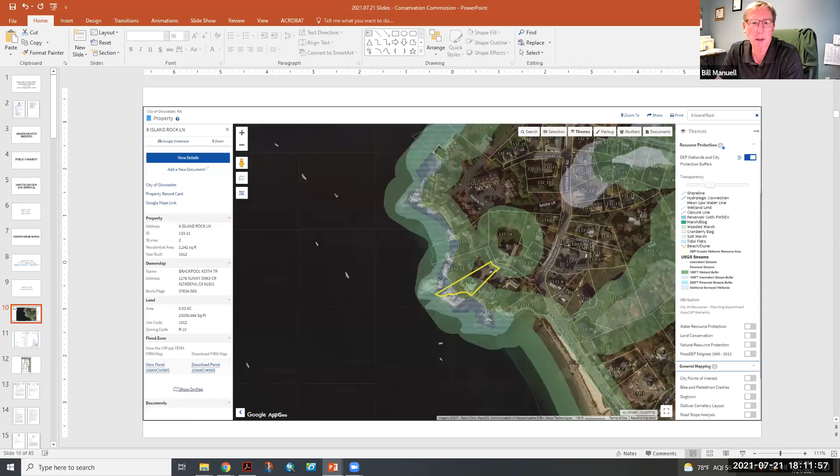Okay, next up, notice of intent 28-2774, 8 Island Rock Lane, Brackpool, Bill Manuel at Wetlands and Land Management representing. Good evening folks, Bill Manuel from Wetlands and Land Management. Speaking about things that just can't seem to get off the agenda, this was one of them, but I'm happy to report that since the last meeting I had a video conference with Kate Frew and Tay Evans at DMF. We worked through some clarifications that they were looking for on the site plan, and those have been provided. DMF has given you a letter dated July 14th stating they have no further resource concerns with the proposed project at this time. So unless the commission has any more questions, I think that was the outstanding issue, and I'd be happy to answer any questions if you have them.

Okay, so first we'll open up the public comment. Hold on a second, let me write something. Okay.

We're going to open up for public comment. Anybody in the public who wishes to speak for or against the project at 8 Island Rock Lane may do so now by hitting the raise your hand button at the bottom of your screen or hitting star 9 on your tablet or handheld device or phone.

I see no members of the public to comment at this time. Hearing none, I'll close the public comment period. Why don't we do roll call comments from the commission?

Sure, commissioner comments. Commissioner Charpentier, no comments. Commissioner Cook, no comments. Commissioner Gradwell, no comment. Commissioner Sargent: I want to thank you for the meaningful revisions you've provided, and I suggest that all material must be non-toxic in a marine environment. That's it.

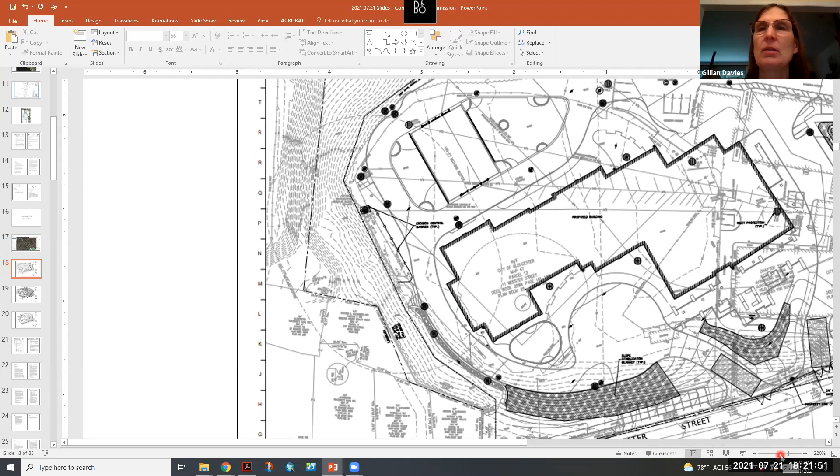There had been a plan to do some seeding and planting, and it was going to be buffer zone planting. So I recommended that be converted to wetland planting instead, and that it could be an opportunity for an educational area — kind of an outdoor science classroom with some signage about wetlands and their significance and the restoration work going on there, and really become a feature, something exciting that results from the project, as well as restoring the wetland.

I made that recommendation regardless of the regulation status, because it seemed like something that people could do voluntarily if they so choose, if it's not a regulatory issue.

I did receive LEC's response to my comments, but just today, and I was already booked for today, so I haven't had a chance to go through them in detail. I'm happy to do that — I will go through them in detail and provide a written response once I have a little more time for that.

Does anybody have any questions? And then Dominic Rinaldi, our engineer, will be able to talk about the stormwater aspects. Commissioners, any questions at this time? I have none. Okay, why don't we move on then?

We can move to who is going to speak. There we go. Hi, you're up.

Good evening, Dominic Rinaldi, senior civil engineer with BSC Group. Thank you for bringing up the letter. So we issued a letter — we went through the plans and stormwater report to review the stormwater management design. I'll go through that.

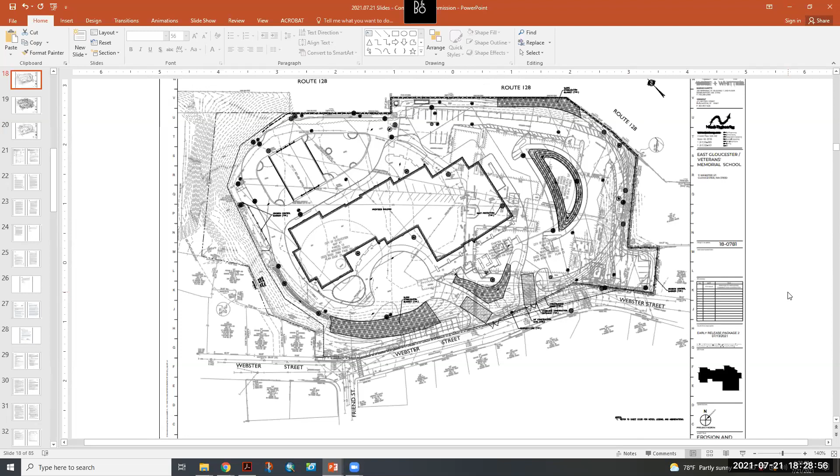That, and I still have concerns about what they consider their retention ponds, because I was told by someone in a retention pond company that you really shouldn't have retention ponds on school properties. We already have one in West Gloucester, and the cover's been off at one time. So there's the 2 big issues that I have.

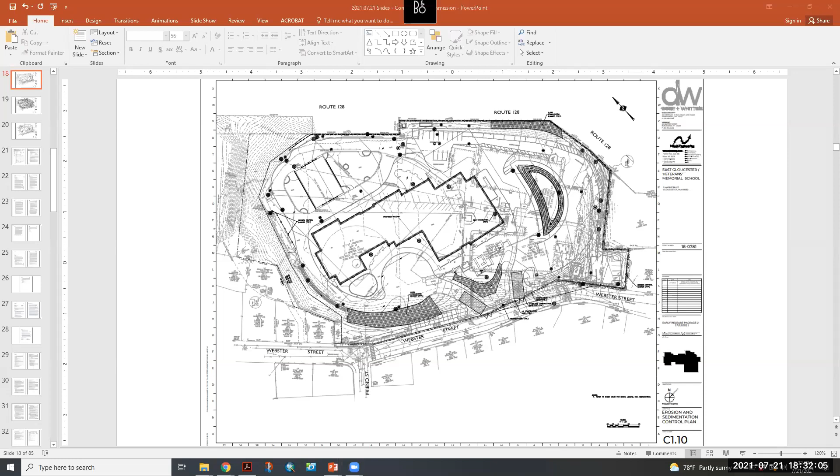Anyone else, Adrian? I see no other hands at this time. All righty then, so I guess if there's no one else.

Seeing none, hearing none, to close the public comment period, what I would do next is probably cycle back to one of the consultants, if anyone wants to answer the questions about the pipes being under the building, or the fill on the edge of the road and some of that, and Ms. Davies' report, or the information she has yet to attain.

I'd be happy to go through some of the wetland concerns and buffer zone related concerns that Gillian had brought up, and that Ms. Armel brought up. Adrian, if you wouldn't mind putting up our response to comments, that would be helpful—and specifically scrolling down to Appendix D.

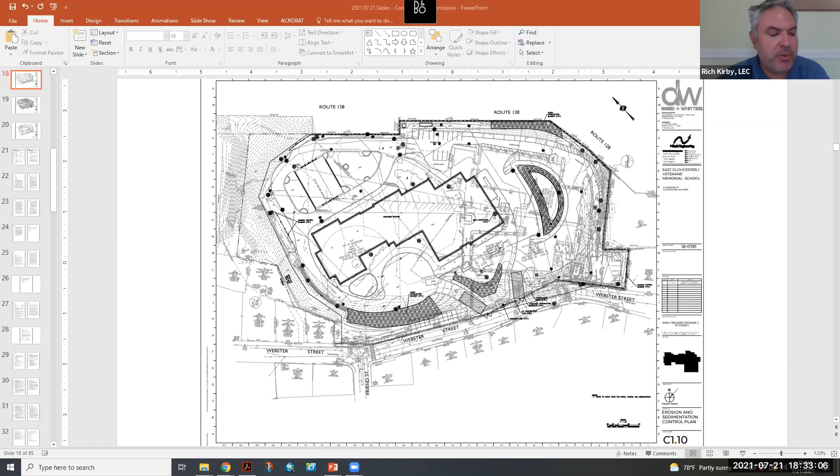While Adrian's pulling that up, one of Gillian's comments was the observation of some wetland plants and wetland soils within the athletic field, the ball field adjacent to the wetland. Of course, as the commission must be aware by now, the wetland is a long linear wetland along the edge of the field behind the tall chain link fence, and measures about 600 square feet. It's not very big, and basically it takes surface runoff and groundwater seepage that comes off the hillside from the west, and directs it northerly toward an existing concrete catch basin. We're going to be replacing that catch basin as part of our project, but we're going to keep the elevation the same so that the hydrology of that wetland remains unchanged.

It's also worth noting that at least when we did our original evaluation, it seems the groundskeepers were maintaining the vegetation within the wetland behind the chain link fence, I think to try and keep the vines and overgrowth off of it. That's what it looked like when we did our original site evaluation last year. Now, however, it appears they've ceased maintaining that vegetation, and it's come back rather nicely with some jewelweed and other wetland plants.

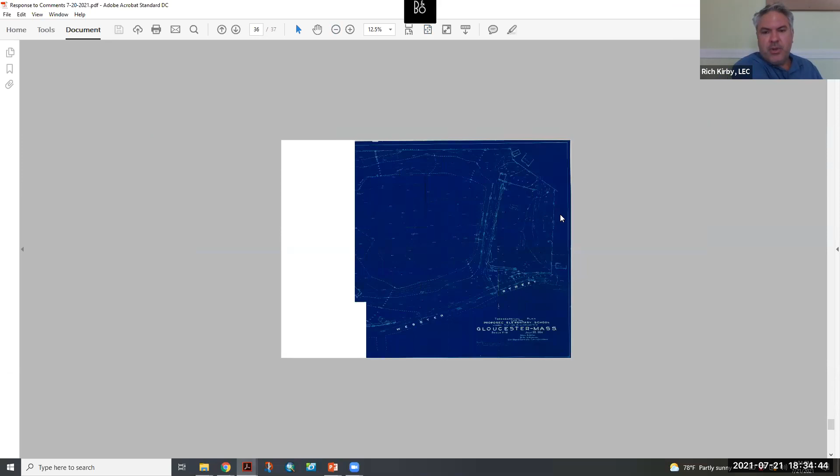So, getting back to the status of the field and whether or not that's jurisdictional—this is a 1954 plan that shows development of the site, and it's really hard to see at that scale, but basically the ball field is to the left, and the backstop is just to the northeast of the bleachers. You can see the chain link fence backstop, so home plate was right to the north, there are the bleachers, and just to the north of that, the chain link fence that looks like a trapezoid—to the right, there, right there. So home plate was right in front of there. And you can see behind home plate some natural sloping that probably was the initial effort at developing this site.

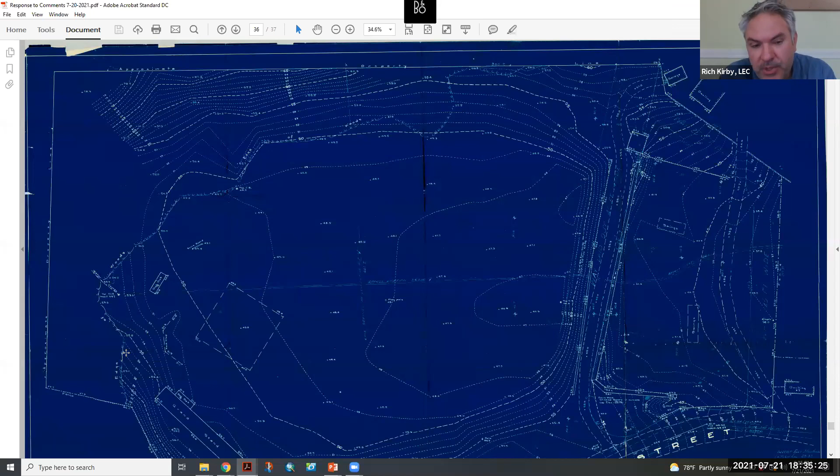If you scroll to the 1957 plan, that's when improvements were made, or certainly proposed. The backstop was moved to its current location, the bleachers are shown there, and you can see the relatively steep slope that parallels the third baseline. That represents more or less the conditions today. So we believe that the field as it occurs now is basically how it occurred circa 1957.

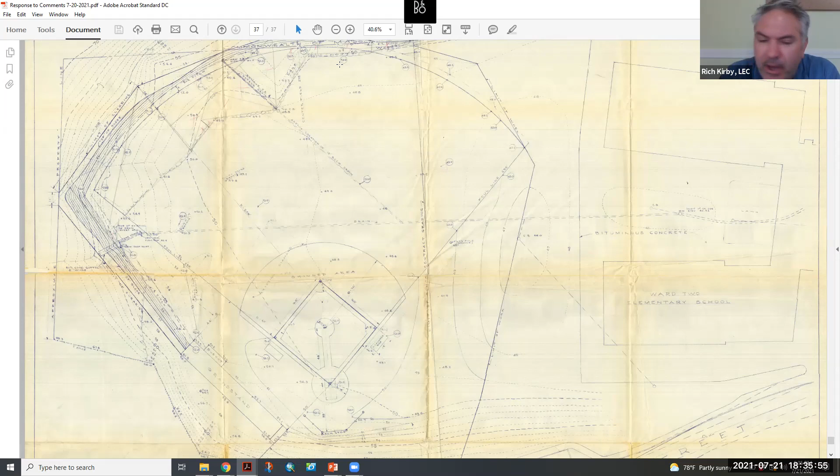Adrian, if you could go to attachment C that shows the revised landscape plan.

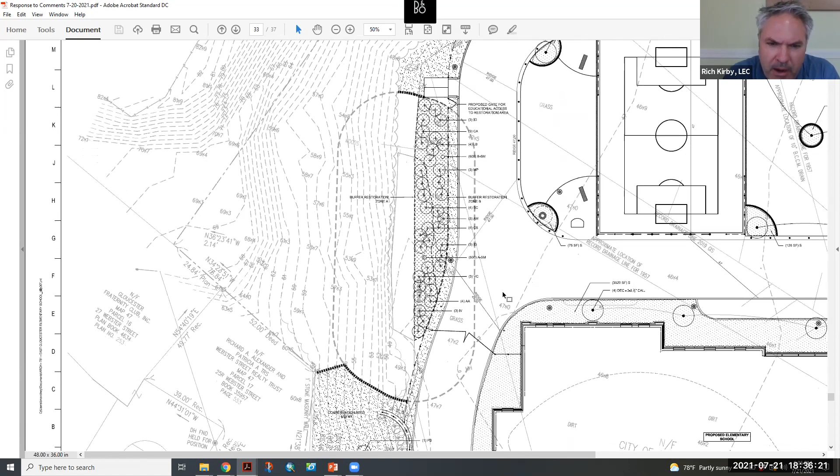I don't think it changes the wetland delineation based on these old plans, but we are proposing buffer zone restoration, and we've fine-tuned that restoration to better represent the hydrology and conditions in the field today. To the right of the wetlands there's a zone of planting, that shaded area. Within that zone there's a line running north and south that cuts it in half. The section immediately adjacent to the chain link fence is the wetter portion of the buffer zone restoration, and we've tailored the planting plan and seed mix to propose shrubs and seeds suited to wetter conditions.

I went out there this past Sunday to take measurements to determine the extent of that wetter portion of the buffer zone restoration. The wetter portion measures 500 square feet, and the balance is another 600 square feet, giving us a total of 1,100 square feet of buffer zone restoration. The balance has more facultative plants that grow in both wetlands and uplands.

This area has a fence along the right side, a 4-foot high fence that parallels most of the paved access road. There'll be a gate in that fence, right near the cursor, to allow students access to enter the restoration area.

We've chosen plants that are interesting to look at, with interesting smells and flowers, and some seed mixtures with a variety of wildflowers and perennials, to really provide an educational focal point for students to learn about wetlands and the restoration effort we've proposed. We may propose some signage along the gates, that's yet to be determined, but this restoration improves the function and value of that buffer zone to protect the adjacent wetland.

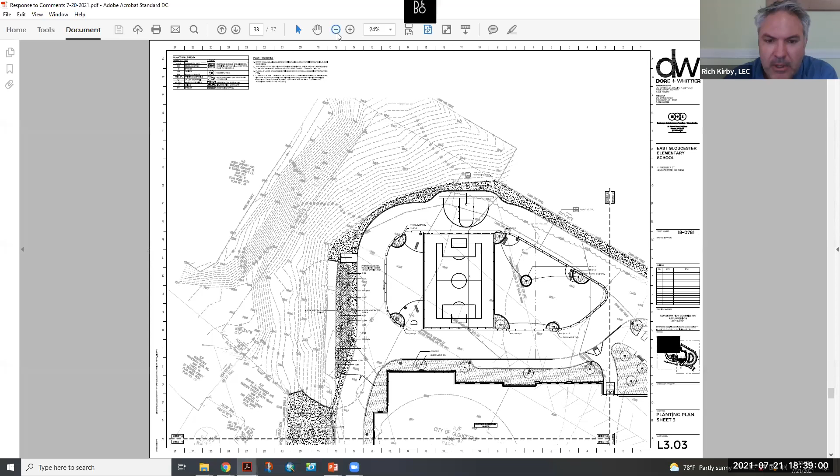We also provided responses regarding the existing chain link fence I mentioned, which will be removed by hand and disposed of appropriately, and replaced by the fence that parallels the access road. That'll all be within the buffer zone.

Sorry, there we go. I have a couple of screens up here.

To get back to public comment concerns - what about the pipe under the building, and the comment about retention or detention ponds not being, or should not be, utilized on school property? Have you ever heard of these issues? That's more of an engineering comment, and I would turn that over to Paige from Nitsch, who can answer those questions.

I don't know if you want to transition over. If you're complete - I think you covered everything, but if you feel you need to. Yes, I covered Jillian's comment that she just made, and the abutters' comment. So I'm happy to shift gears over to Nitsch if it pleases the commission. Yes, please. Hi everyone, I'm Paige Simmons.

I'm with Nitsch Engineering. Can everyone hear me? So to address the comment about the pipes under the building - those pipes are in the existing condition, and they're being removed in the proposed condition and rerouted to address the drainage needs of the proposed site. So there will be no pipes under the building in the final proposed condition.

As for the infiltration basin, it's only designed to fill up approximately 6 inches in smaller storms, and the basin will drain within 52 hours. It's required to drain within 72 hours per the Mass DEP requirements.

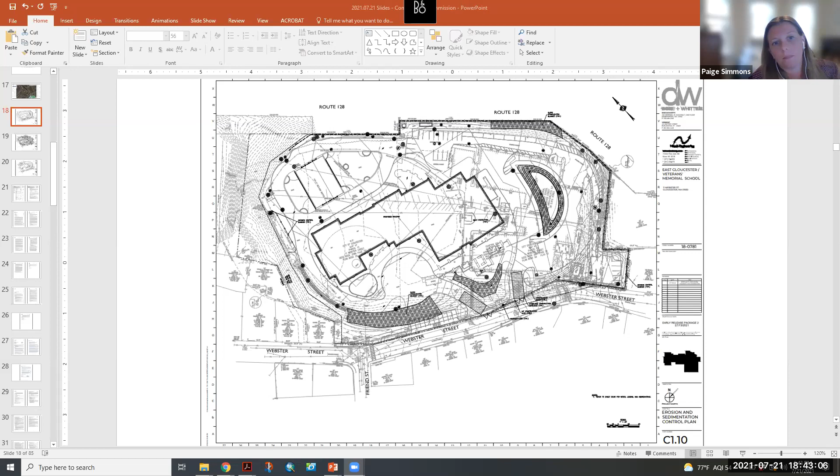Commissioner comments, Commissioner Charpentier. Could you point out where these infiltration basins are? The detention, it's hard to read on this map, or my eyes are getting old. It's actually not on this specific plan. Do you have the utility plan? Maybe one more. Yep, this one here.

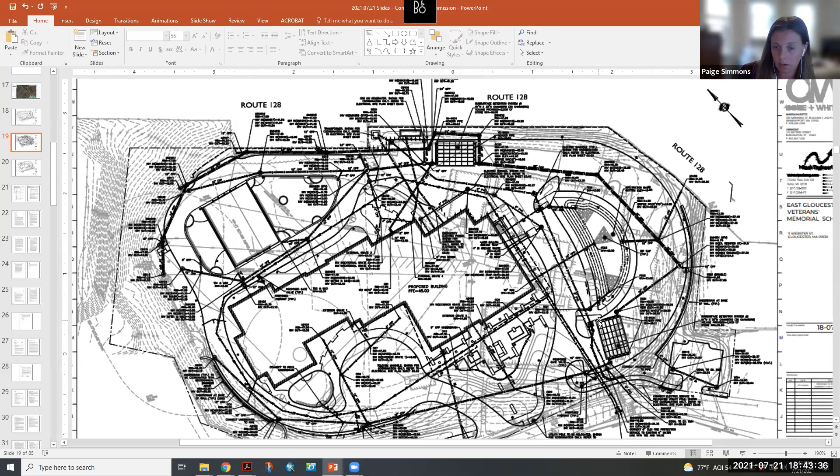So the two that have the boxes are the subsurface chamber systems, one at the top of the site and one at the bottom right side of the site. Those are both subsurface systems that are lined and will not be infiltrating, but will slow down stormwater runoff. Then in the center of the site, in the parking lot, there is the surface infiltration basin that will collect water and then infiltrate it into the ground. The crescent shaped one. Yes, correct.

And you said there's not going to be any standing water there, right? Nope, in the 100-year storm it draws down within 52 hours. Okay.

Are you good? Yeah, the other question I had is, one of the folks who talked earlier talked about the incredible amount of paving that was going to go on. What is the change in the impervious relative to what's there now? I'm sure it's pretty large.

I believe it's 1.9 acres. And the versus the current is what? 1.9 acres, current impervious is 1.9 and the proposed is? That's the increase, the net increase is 1.9 acres. The change. Okay, from what though? I'll have to find that specific number.

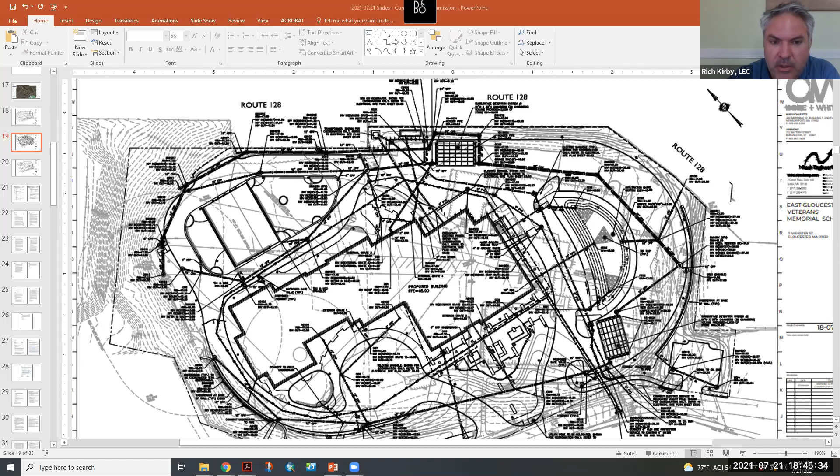To add a little color to Paige's comment while she's looking up the existing versus proposed numbers: the work that's in the buffer zone is focused within the existing previously developed portions. We have a pretty good large section of wooded buffer zone to the west of the wetland and to the north that will remain untouched. So the work we're proposing is largely within the previously developed portions of the buffer zone. I do have some of those numbers to provide a bit of context.

A portion of the proposed structure, the roof area, measures roughly 4,565 square feet, so about 12% of the buffer zone. We have about 22.5% of the buffer zone, 8,062 square feet, that'll be pavement associated with the roadway. And the playground represents roughly 4,390 square feet of the buffer zone, but of course that will be a permeable rubber surface.

So just to give a little bit of a sense of what will occur within the buffer zone. I think it's also important to note that in a project like this, any school project, you're trying to balance a lot of different pieces.

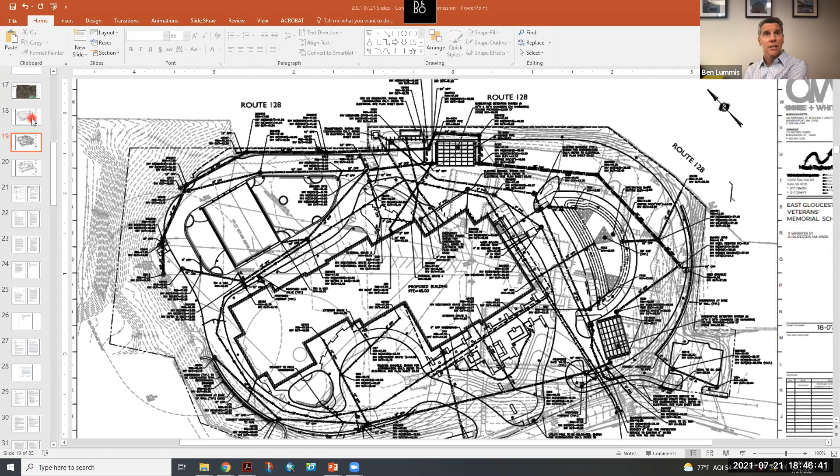Two important pieces to balance here are enough parking for staff and families, and enough circulation to take traffic off of the neighborhood streets during your short times of arrival and dismissal. And then the other important piece is the additional Article 97 land swap, as I think you're all aware, and we are adding green space, open space at the East Gloucester site when the city takes down that school. So there are many pieces to this.

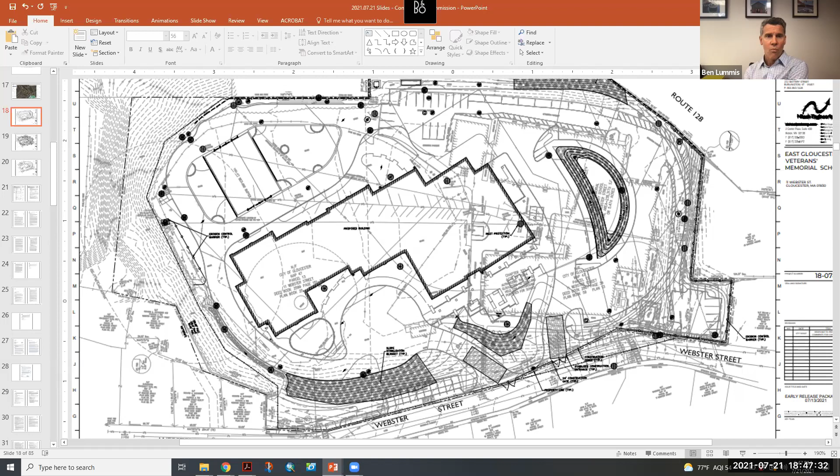I just want to expand on the notion of open space. It's not just this site, but also the current East Gloucester site, which will increase the amount of open space there. I would also add that this project as a whole has a very limited buffer zone that we have jurisdiction over, so we're pretty limited on where we can talk and what we can talk about.

Right. Okay, I have no other questions. Okay, Commissioner Cook.

They're not really questions, I have a couple concerns in reviewing the responses to BSC, which, by the way, really thank you. That summary was very concise, it was easy to read. It looks like they've agreed to pretty much everything.

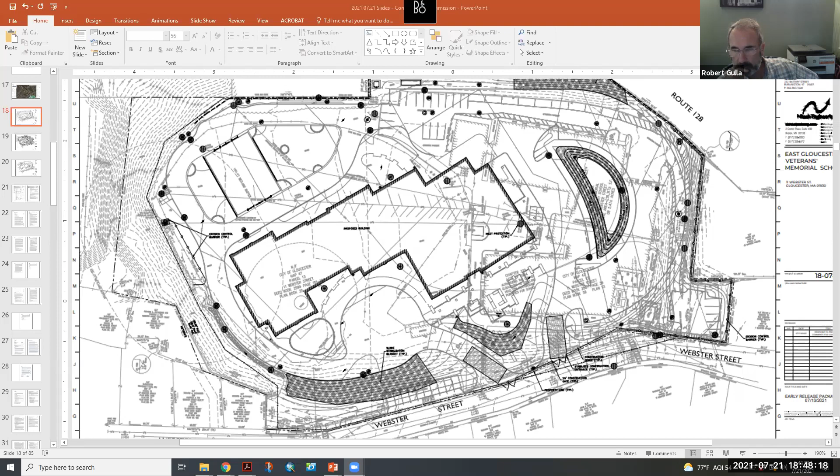There's two notes. One is in item 9, where it talks about after the building is demolished, putting in the test pit. The requirement says that as a condition, the test pit can be provided. There's going to be a lot of work here, so trying to remember everything that we're going to be conditioning could be a little hard. But I wanted to point out that in the response it says the test pit can be added as a condition. I don't know if we can add it more formally into the NOI, all the work steps to show it there rather than it being dependent on us to create it as a condition.

The same thing applies in item 13, with recording the long-term pollution prevention. I'd rather have the NOI say that it will be done versus us trying to remember to make it a condition when this is finally settled. But those were the only two things, the only two questions that I had.

All right, who's next? With regard to the long-term pollution prevention plan, I believe Nitsch had submitted that as part of their response to BSC comments this week. So that's been completed and can be included as part of the record. Excellent. That's correct, we did include it.

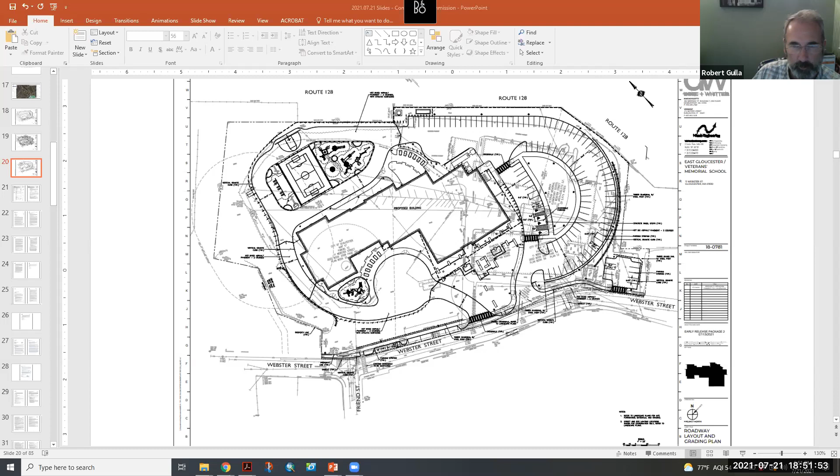So with that, I would assume we're continuing to clean up some loose ends, but in my opinion things look pretty good here at this point. Commissioners had a few comments, the public had a few comments. There's a few gaps, I guess, in getting Ms. Davies to take a look at the documents and review those in a little more detail. So I would assume a continuation to the next meeting is in order, correct?

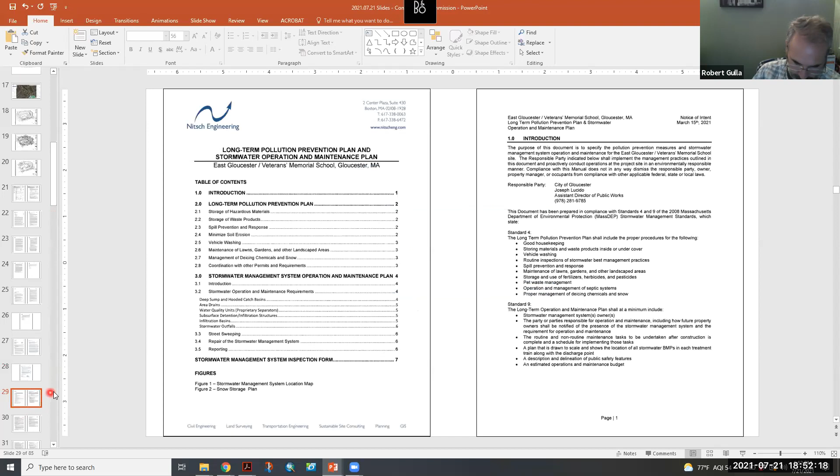Yes, we'd like to continue to the August 4th meeting. Okay, Commissioner Jackson moves to continue 11 Webster Street, NOI 0282776, to the meeting of August 4th. Charpentier seconds. Roll call: Commissioner Charpentier, yes. Commissioner Cook, yes. Commissioner Gradwell, yes. Commissioner Sargent, yes. Co-Chairwoman Jackson, yes. Co-Chairman Gulla, yes. Thank you very much.

Thanks, everybody, we'll see you in a couple weeks. Thank you, folks, really appreciate your effort and work on this. Thank you all for being here tonight.

Okay, next up, no DEP number, 24 Fernwood Lake Ave, Mingzu Yang applicant.

So I did actually track down this applicant. It happens that they were selling the property, which is how they came to need to repair the deck, and have since actually closed. One of the agents in the transaction and I spoke, and they were authorized to make the request to withdraw without prejudice. No work was completed.

Oh, okay. So I guess we move to withdraw, to accept the withdrawal. Just writing things down. Okay, Commissioner Jackson moves to withdraw without prejudice, NOI, no DEP number assigned, for the project at 24 Fernwood Lake Avenue.

Charpentier seconds. Roll call: Commissioner Charpentier, yes. Commissioner Cook, yes. Commissioner Gradwell, yes. Commissioner Sargent, yes. Co-Chairwoman Jackson, yes. And Co-Chairman Gulla, yes. Thank you.

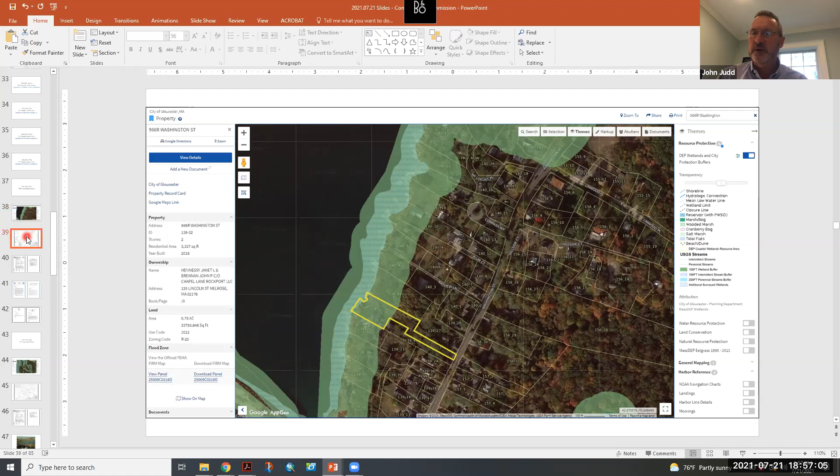Thank you, Mr. Chairman, members of the commission. For the record, John Judd, Gateway Consultants. You may recall we presented this project on June 16th. This is a proposal for a seasonal float and ramp along with a pier that would be situated above the intertidal zone. Thank you, Adrian, for putting up the plan. Also proposed are an addition and a pool that was previously existing on this property, and it was re-permitted to be installed on the last notice of intent when this property was reconstructed about 4 years ago.

That was permitted, so we're back to have these activities proposed. At our meeting on June 16th, there were 4 comments, I think primarily from Mr. Sargent, that I had written down. One of which was the mitigation planting area, which I don't believe you have the latest plan, but it should be in your file. We show mitigation planting along the coastal bank that offsets the 1,000 square foot increase in impervious area proposed within the buffer zone.

Also, the abutter, Mr. Arnold, has submitted an email, which I believe is in the file and should have been circulated to the members. That was dated June 29th, and he states, as an abutter immediately southwest of the property, I have no objection to the pier and seasonal float on the plan created by Gateway Consultants for Tom Grady. So that has been endorsed by the neighbor.

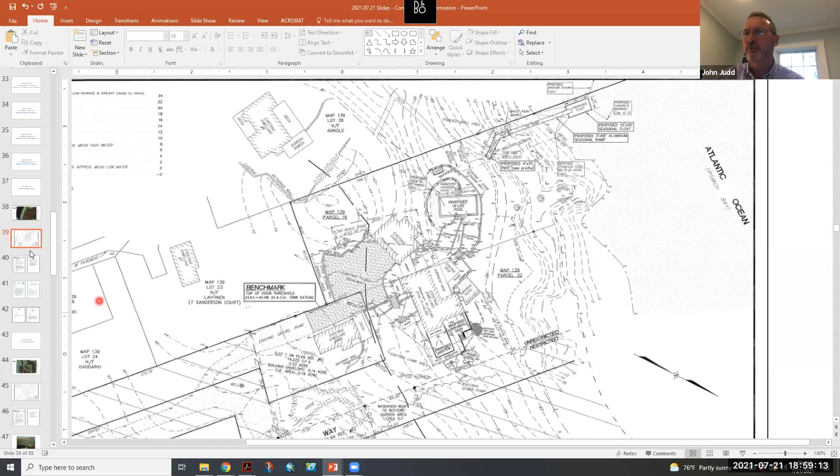Finally, we do have a letter dated the 14th of July from DMF endorsing the project. We did have an eelgrass diver go in to the property, and that was established on the revised plan of June 28th.

So the letter dated July 14th from DMF essentially endorses the project, indicating that there would be no impacts to the eelgrass. So that is a description of where we are, and I think we've addressed all the comments and can answer any questions that you might have.

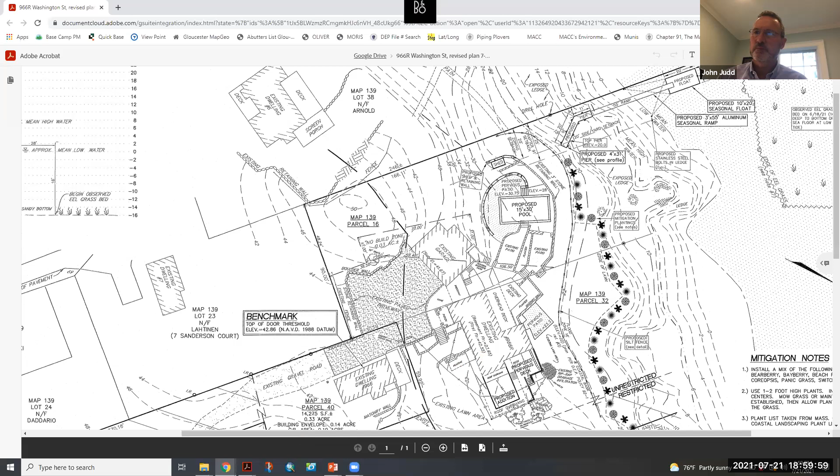Okay, thank you. Next up, we'll do the public comment period. Anyone who wishes to speak for or against the project at 966R may do so now by hitting the raise your hand button at the bottom of your screen or hitting star 9 on your handheld device or phone. No members of the public at this time. Seeing none, hearing none, I'll close the public comment period.

I guess we'll just roll into roll call comments. Sure. Commissioner comments. Commissioner Charpentier, no comments. Commissioner Cook, no comment. Commissioner Gradwell, no comment, everything's fine. Commissioner Sargent, yes, thank you John for the meaningful revisions.

The proposed mitigation for the increased impervious area for the proposed new addition, shed, and retaining wall is roughly 1:1. I'd really like to see a ratio closer to 2:1, as well as monitoring for at least 2 years. And obviously, all material for the ramp of the float must be non-toxic to the marine environment.

Okay. Co-Chairwoman Jackson, no comments. Co-Chairman Gulla, no comments. Okay, thank you. So at this point, what I would probably do, John, are you willing to accept

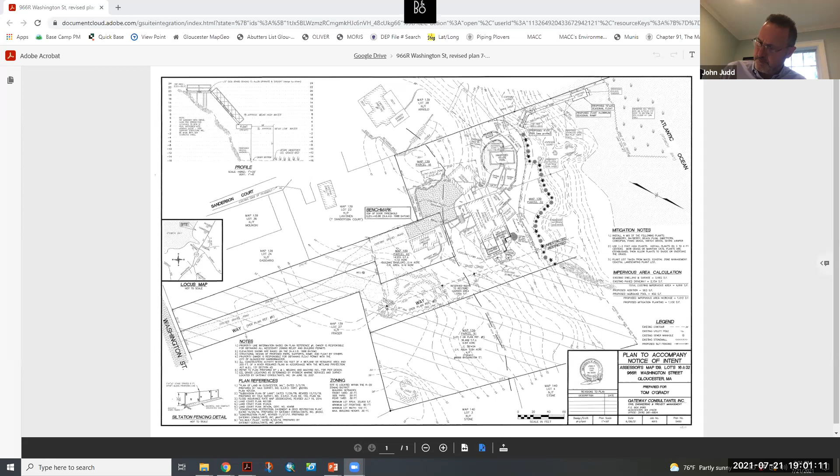the comments by Commissioner Sargent to get it closer to 2:1 and the other couple items he mentioned, to move this forward? No problem. Obviously no issue with the non-toxic materials, that was not intended to be installed anyway. And we can certainly increase the plantings along the coastal bank to meet the 2:1. That shouldn't be a problem on this size property.

Okay, so the final question would be, commissioners, do we want to wait for the planting plan, or are we ready to approve this and move it forward now? It's always a little ticklish. We like to see it before if we can, but I'm open to comments.

I'm good with Adrian looking at it, but we'll see how other commissioners feel. This is Linda, I agree with Ann and Joe. Okay. Barry, any thoughts? No, that's fine by me. She can review it just as well as the 6 of us can. Bill? Nope, no problem with it moving forward. Okay, alright, I guess we move it forward.

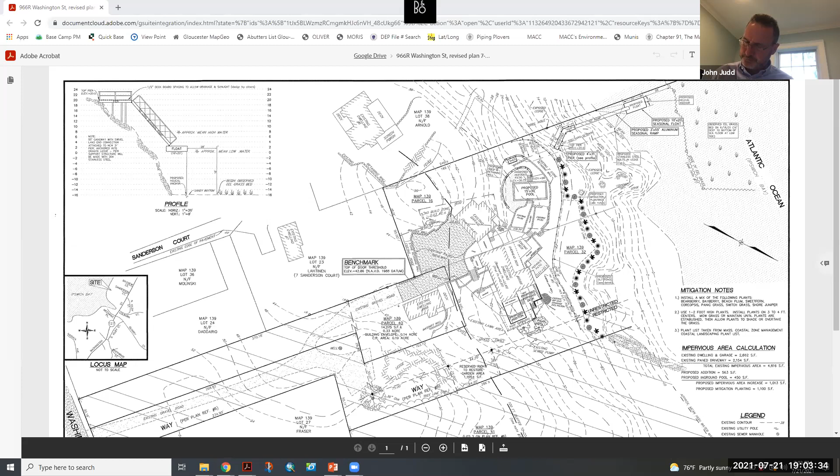Commissioner Jackson moves to approve the project NOI 0282787 at 966R Washington Street with the aforementioned conditions. Charpentier seconds. Roll call: Commissioner Charpentier, yes. Commissioner Cook, yes. Commissioner Gradwell, yes. Commissioner Sargent, yes. Co-Chairwoman Jackson, yes. Co-Chairman Gulla.

Yes, with discussion, do we have all the points that Mr. Sargent mentioned? So it was mortality, it was planting plan up to 2:1, but I thought there were a couple more things in there, Dave. That was just non-toxic to the marine environment. Okay, then yes. Okay, thank you.

Next up, notice of intent 28-2788, 97 Coles Island Road, Barry, John Judd, Gateway Consultants representing. Once again, thank you, John Judd, representing Julia Barry and Chris Crotty for this proposal for the seasonal ramp and pier and float that is their property or properties, several properties out at 97 Coles Island Road.

We did have that meeting on the 16th prior to Adrian going on vacation, and we really hope to get a site visit with the commissioners out there. And I know we tried to tag it on with the Atlantic Street or sidewalk, and it just didn't work out for Julia and Chris. So we were simply asking to maybe schedule a site visit for the board members to go out and take a look at this beautiful property and what they plan on doing out here, and take a look for yourselves to get an idea what the property looks like in the location.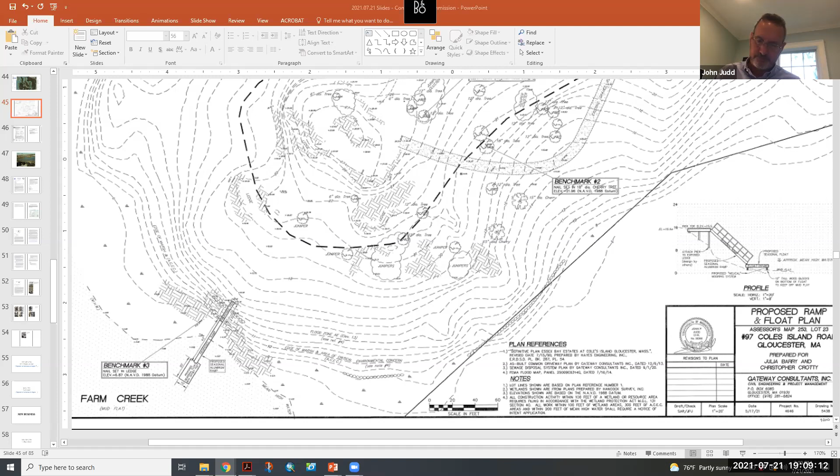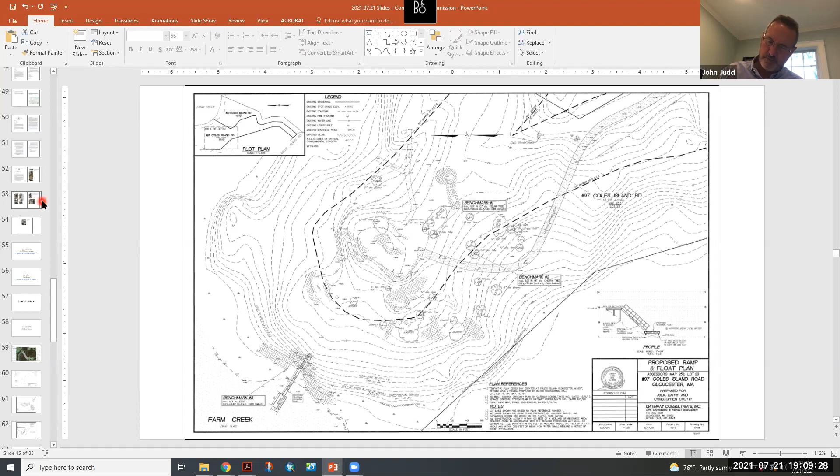We'll move to continue. Commissioner Jackson moves to continue NOI 0282788 at 97 Coles Island Road to the meeting of August 4th. Charpentier seconds. Roll call: Commissioner Charpentier, yes. Commissioner Cook, yes. Commissioner Gradwall, yes. Commissioner Sargent, yes. Co-Chairwoman Jackson, yes. Co-Chairman Gola, yes. Thank you.

Next up is RDA 1703 Salt Island LLC, Martignetti applicant. I believe the applicant requested a continuation to what date? Chairman Gola, you skipped Essex Ave. I skipped who? Essex Ave. Oh, I'm sorry.

Let's back that up. Next up is notice of intent 28-2786, 65 to 73 Essex Avenue, 65 to 73 Essex Avenue LLC, Megan Kearns of Epsilon Associates representing, and they request to continue to August 4th.

Okay, so Commissioner Jackson moves to continue NOI 0282786, 65 to 73 Essex Avenue, to the meeting of August 4th. Charpentier seconds. Roll call: Commissioner Charpentier, yes. Commissioner Cook, yes. Commissioner Gradwall, yes. Commissioner Sargent, yes. Co-Chairwoman Jackson, yes. Co-Chairman Gola, yes. Thank you.

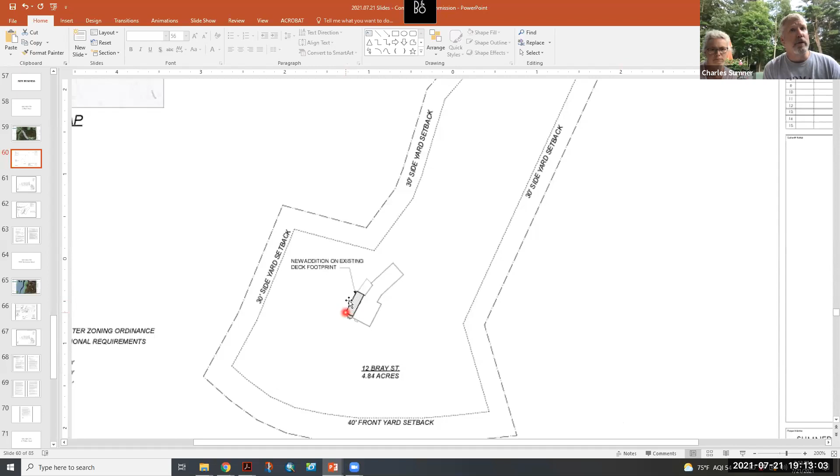We are proposing a small addition off the back of our home at 12 Bray Street, which would fall pretty much upon an existing deck that I actually removed back in late May, before I realized we were in the buffer zone. It's a small shed style addition, about 34 feet long by 12 feet out, with a knee-high foundation running off the back of the house, on the existing porch that's been removed. I think you all have pictures of that.

We are also proposing to include some rain barrels to capture rain off the roof that will be added, as well as some plantings: inkberry, American holly, high bush blueberry, and sweet viburnum. We also have existing plantings off the back already, some rosa rugosa, lilac, and holly.

This is a new process to us, so we're looking for guidance and making sure we're following proper procedures here, and we'd like to get started. We had originally planned to get started back in late spring, but that got pushed off a bit with this process. Well, it's a good start, you're doing well, so good for you.

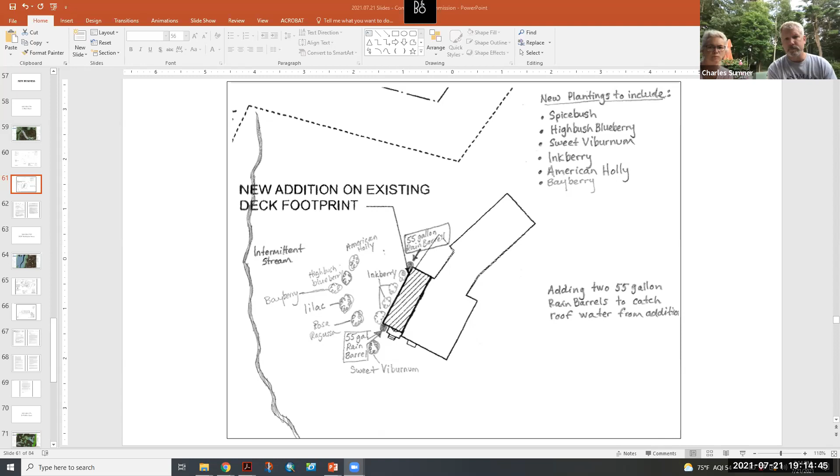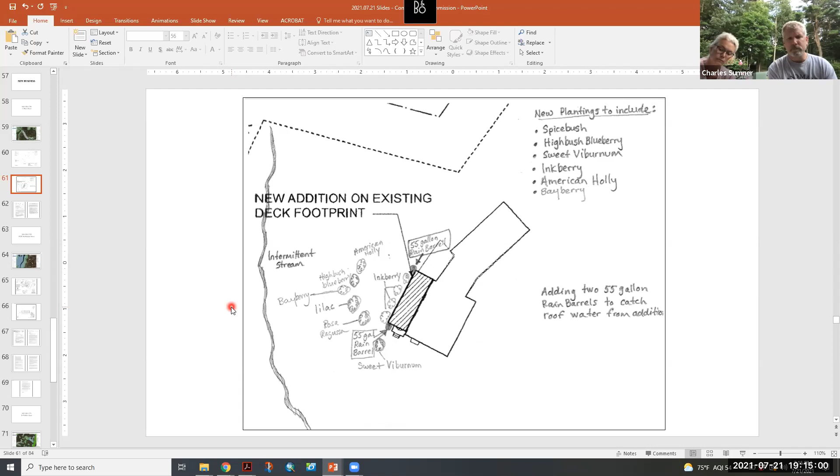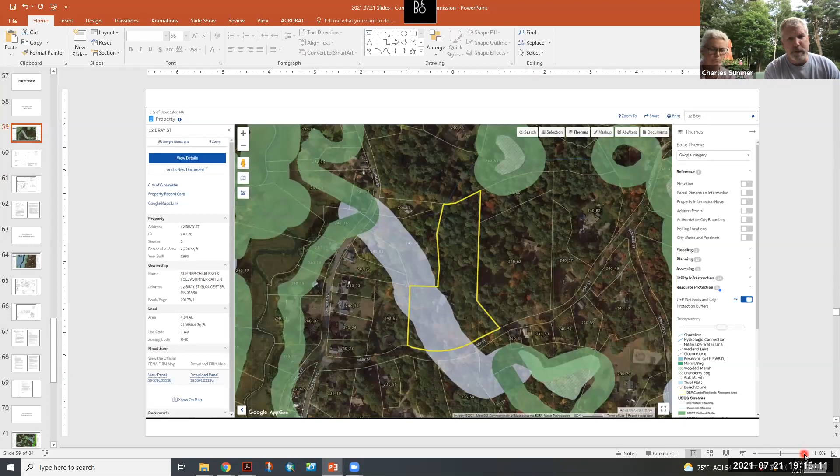The only thing I didn't see here, and we'll do roll call comments, was just the distance from the resource. Could you give me an idea of how far you're from that intermittent stream? Yeah, this year has been a little different with all the rain, but usually that intermittent stream dries up by June, but we're about 100 feet from that stream. Okay, I'm just curious, okay, that's good.

So if you want to go into roll call comments. Sure, commissioner comments. Commissioner Charpentier, no comments. Commissioner Cook, just a question - I didn't see the pictures, but the old deck was just an open deck, no roof, correct, and the new deck is going to be covered? It'll be an addition to the home, so it'll give us some space inside for a dining area and a living area, so it will be a 4-season addition, no plumbing of any kind.

It will have to add some heating into that, obviously, but it's basically encapsulating and closing in what was once an existing pressure-treated deck. Yeah, what we're getting at is whenever you're adding more impervious surface, you're impinging on nature's ability to filter and allow water to move through, so usually we require a certain amount of mitigation to offset what you've done here. You've provided a planting plan, and it's up to the commission to determine whether that plan is enough to offset it, but we'll go through that a bit.

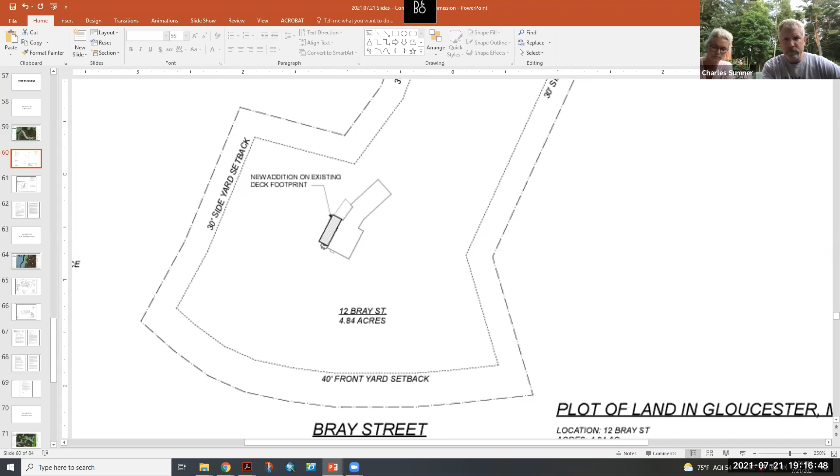Okay, that was Commissioner Cook, I believe. Now Commissioner Gradwall, no comment. And I'm sure that if they have to add a few more plants, they'd be happy to do that so that they could proceed.

Okay, Commissioner Sargent. Yeah, I'd also like to know how much impervious surface they're adding and how much area of mitigation they're planting, and I'd like a 2-year mortality on that. I also noticed that they were very smart and opted to choose mitigation plantings that are deer resistant. Yeah, you've learned that lesson.

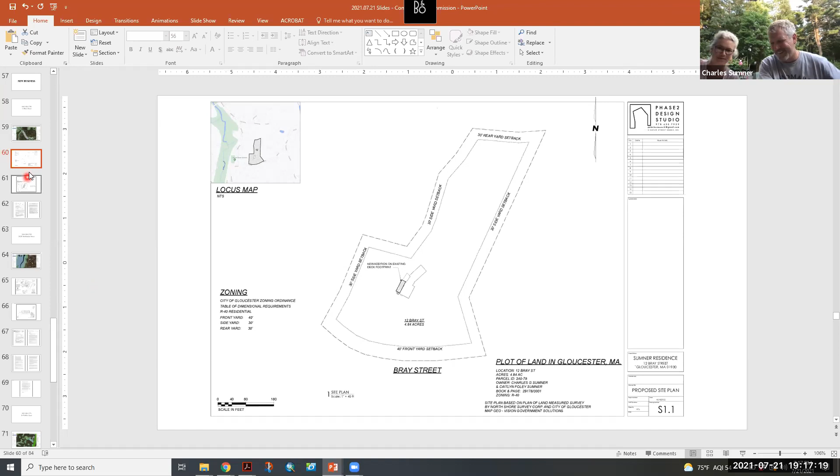Well, I don't know if I can speak to those numbers, maybe I can get some guidance from Agent Lennon on that, but we're happy to provide whatever mitigation. In our plan, we've provided for a silt fence before we start and some hay bales to help offset any disturbance of sediment or soils. We don't plan to do a lot of digging - I've spoken to our contractor and the guy who's doing our foundation, and there's not a lot there in terms of digging. There's going to be no basement, it'll be a knee-high foundation, but it is a 36-foot long by 12-foot foundation.

Okay, so that gives you 432 square feet of new impervious surface, so you need 800 square feet of plantings. Okay.

That sounds doable to us. If I could take you around on my computer right now, you'd see that we're... No, we're good, I think this is pretty straightforward. We can keep moving, okay.

So keep going with commissioner comments. Adrian, please. Sure, Chairwoman Jackson? No comments. And Co-Chairman Gullah? I guess we're done.

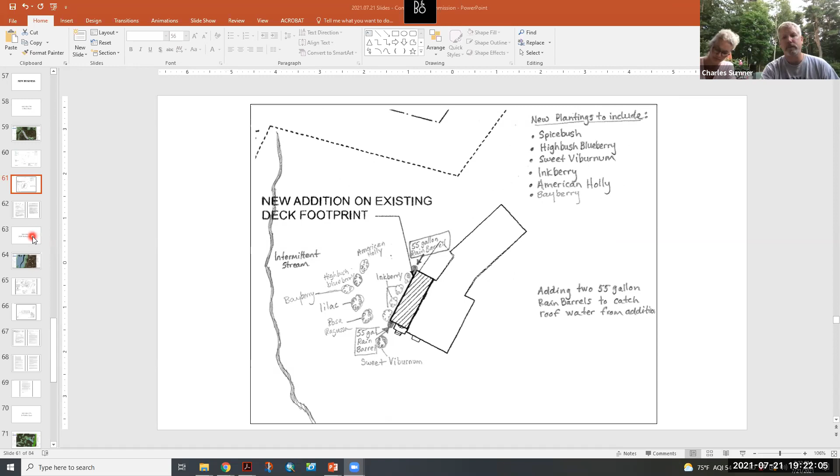Next up, notice of intent 28-2790, 502R Washington Street, Olson, William Manuell of Wetlands and Land Management representing.

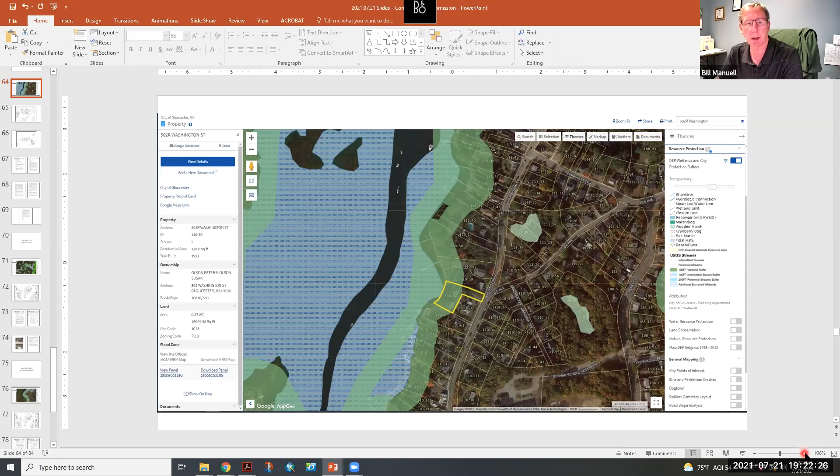Good evening again, Bill Manuell from Wetlands and Land Management. I believe Susan Olson, the owner, is here on the Zoom conference as well. She lives at 502 Rear Washington Street. This is a home that abuts the Mill River.

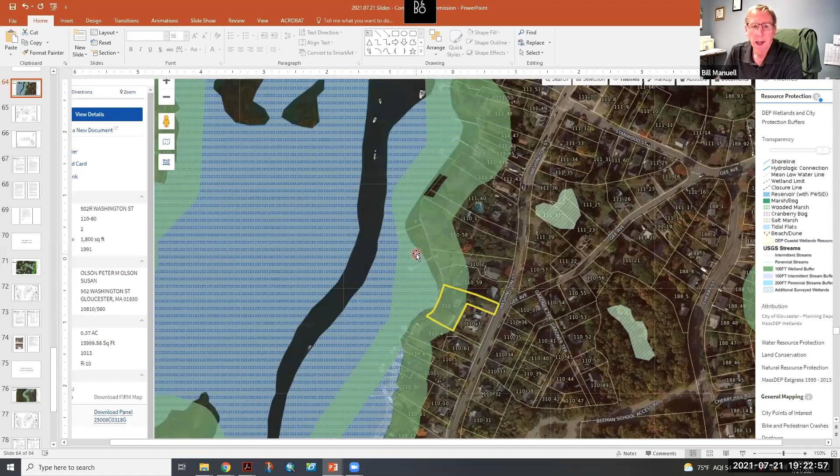You can see it's kind of a pork chop shaped lot, with the arm of the pork chop coming out to Washington Street, just where Gee Avenue intersects Washington Street. The Mill River on that screenshot is to the left of the property. And she has a failing seawall.

A portion of the wall along the river has failed. That's the good portion where Adrian was just highlighting, and where she is now is the failing portion. It is severely eroded — that one bush in the middle of that hatched area, which signifies the area of erosion, is clinging to the bank by a couple of exposed roots.

Susan is obviously very concerned to get some stabilization work done before the next winter storm season. So the area of work — the north would be straight up the page on the top side of the plan. Everything from the northerly property line to the existing shed is in fine shape, and we don't need to touch that at all. The area underneath the shed, where you can see steps down to the water, down to the southerly property line, has been significantly undermined. It appears to have been a stacked boulder wall.

Whereas the northerly side was a masonry wall, it's a mortared granite wall. So there's the difference, and basically the wall is completely failed.

What we'd like to do is repair it by creating a new dry stacked boulder wall. We would backfill behind the wall, install filter fabric, then backfill with double washed crushed stone, encapsulate that with the filter fabric, and that would fill in the area that's been eroded.

I don't think we're disputing the merits of it, but we want to be technically correct about whether or not maybe we should vote on, you know, Adrian, maybe you can chime in here. Should we have voted on it being a riverfront project, already previously developed, or is it small enough where we can just approve or disapprove as is? I think this is redevelopment in the riverfront. Yeah, that's what I figured.

Okay, should we vote on that first? That works. Or we can just consider it redevelopment? Okay, yeah, we can do that after we finish going through comments. Yeah, well, I think I'm the last one and I'm good.

Commissioner Jackson moves to consider the project at 502R Washington Street, NOI 0282790, as a redevelopment project. Charpentier seconds. Roll call: Commissioner Charpentier, yes. Commissioner Cook, yes. Commissioner Gradwell, yes. Commissioner Sargent, yes. Co-Chairwoman Jackson, yes, and Co-Chairman Gullah, yes. Thank you.

Okay, well, I guess we move to close the hearing then? Commissioner Jackson moves to close the public hearing for NOI 0282790 at 502R Washington Street.

Charpentier seconds. Roll call: Commissioner Charpentier, yes. Commissioner Cook, yes. Commissioner Gradwell, yes. Commissioner Sargent, yes. Co-Chairwoman Jackson, yes.

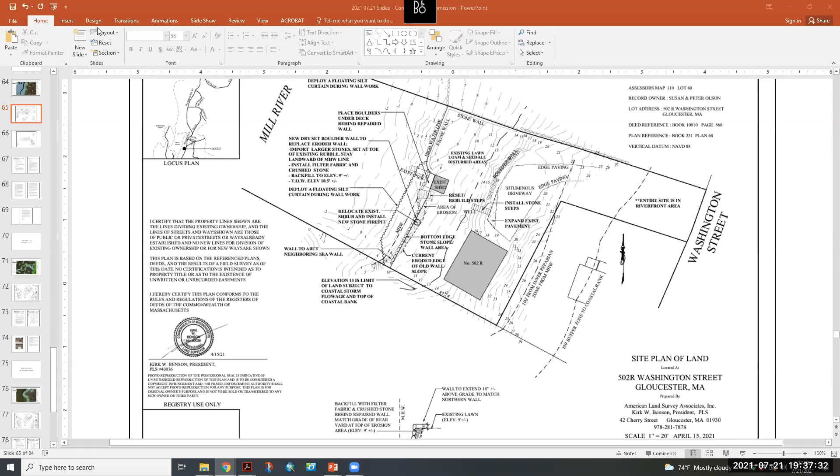We're on 26 Walker Street. What the hell am I? Why are we on 26? Why wouldn't we be? Oh, I'm sorry, it's the revised agenda. Ah, I thought it was numbered. This is the revised, not your fault. It's the revised agenda, he has a number, so I moved him ahead of his compatriots. Okay, so we're at 26 Walker Street?

We are. Next up is notice of intent, no DEP number, 26 Walker Street, Dan Ottenheimer of Mill River Consulting representing. Good evening, Commissioners. I was surprised as well, but thank you, Adrian. I appreciate that. And yes, we do have a file number, it's number 2791. Are the acoustics okay? Can you hear me? Yes.

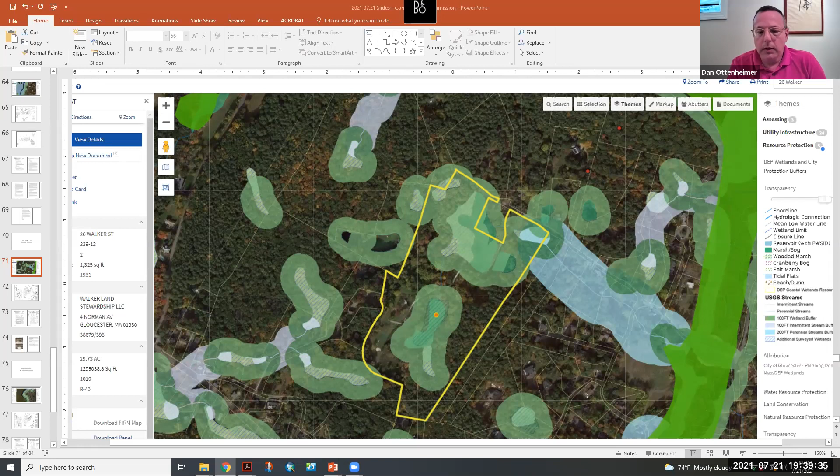Basically, Walker Street ends right about here. There's an existing house up close to the road, and then there's a farm road that comes back into the property. This used to be Newman's Pig Farm. So there is a farm pond that exists in the middle. You can see the roadway that comes through there.

We have been before the commission with an ANRAD to confirm the resource area boundaries, which essentially are BBW back here, BBW associated with the farm pond. There's a lovely stream that's riverfront that heads down to here. Much of this lower area of the parcel is beautiful undisturbed marshland. It then flows, channelized again in a historic stream cut that someone put in there, and heads off site here as riverfront as well.

So what we're primarily looking to do, on the left-hand side, is a blow-up around the house. We're looking to replace the current cesspool with a contemporary, state-of-the-art septic system that's been approved by the Board of Health. On the rear of the house is an existing old hand-dug well, and we're looking to abandon that and drill a new well. You'll see on the far side, the right side of the house, a proposed new well to be constructed. That location has also been approved by the Board of Health.

The other thing in the area around the house, there's an existing fence that's in disrepair. We'd like to just repair it in its same location. There's a very old and abandoned garden shed type structure right up against the bank of the stream. We'd like to remove that, and where that's located, plant native species. There's obviously nothing growing there now.

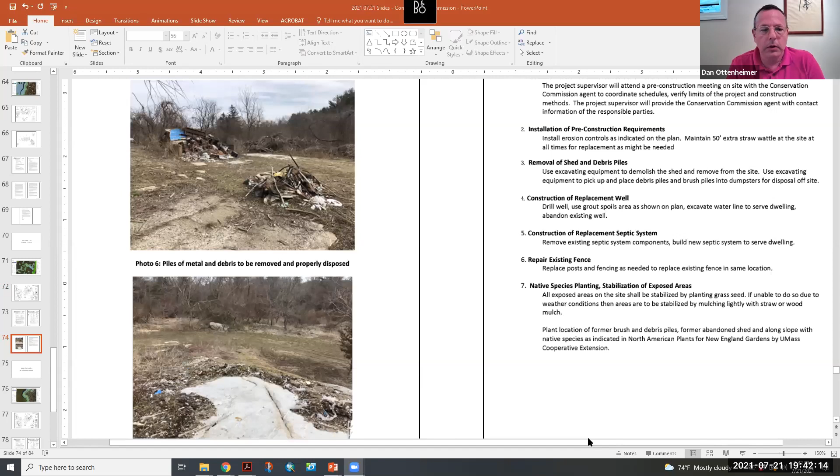The other activity we'd like to do is just to better the property. We're not doing this as mitigation because we don't think we necessarily need to do mitigation for everything I just described, but the owner, Sara Walker, really would like to enhance the property.

There's one area that would really benefit from some blueberry bush plantings adjacent to a stream. It would provide an edge to the driveway so that it would be clear the delineation between the driveway that exists and the stream that exists.

Thank you for showing these pictures, Adrian, that's great. So these are some of the debris piles, and more of the debris piles. So I don't have a picture of the slope.

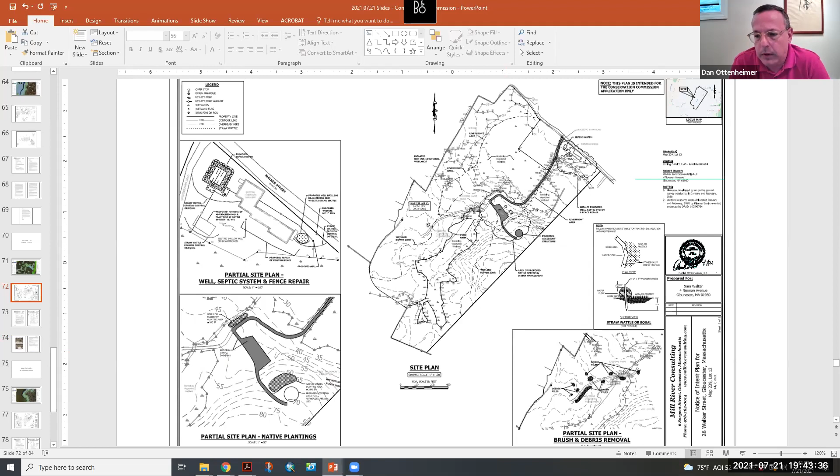Again, it's outside the commission's jurisdiction, but there's about 2,000 to 3,000 square feet on that slope that we would like to plant with native species. So that's what we're looking to do, and certainly take any questions or concerns that the commission might have.

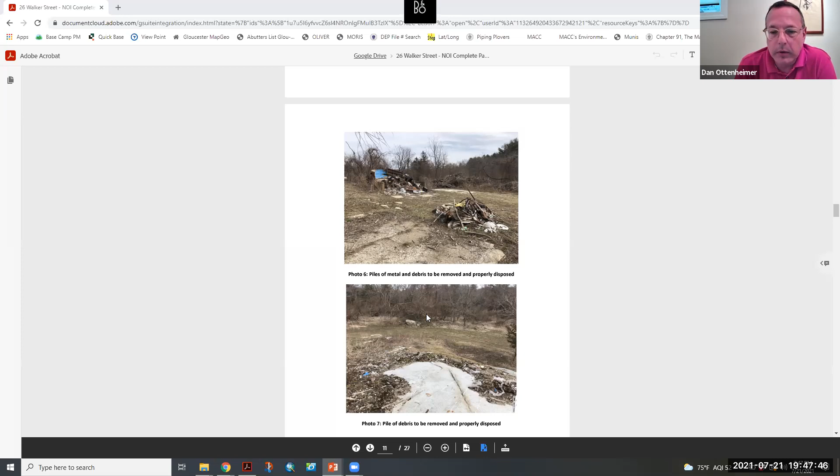We certainly wouldn't want to cross the stream with either of those features, so we're limited to the area right around the house. We also want to keep the well and the septic as far away from each other. So as Adrian's pointing out, we put the septic on one side of the house and the well on the other side.

Well, I guess we're going with the assumption this is redevelopment and we're okay with it. Also, septic system repair is exempt from review under the riverfront regs. Some of the other tasks, like removing the shed, are not necessarily exempt from review, but they specifically state that septic system upgrades are exempt from riverfront standards.

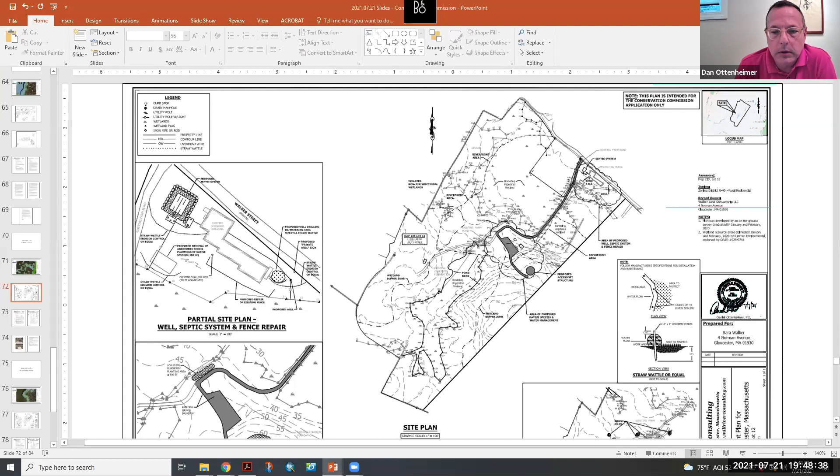Co-Chairman Gullo, no comments at this time. So with that, I assume we're considering it redevelopment, but we still need to vote on it, just to be safe.

The only other item that really came up was the concrete. I get nervous, Commissioner Sargent, that once you get into removing concrete, it's got loose soils and other things, so I'd rather they come under a different filing for that than what we see here. But other than that, I'm fine with it. I don't know if Adrian has anything else to add.

I think for this particular project, it's mostly finishing up what was already done here and bringing the home into building and public health compliance. So there's no reason not to move forward.

All right, so I guess we should do the vote on the alternatives analysis first. Are we voting that it's redevelopment then? Yes, I would think. Okay. Commissioner Jackson moves to consider the project NOI 0282791 at 26 Walker Street as a redevelopment project. Charpentier seconds.

Roll call: Commissioner Cook, yes. Commissioner Gradwall, yes. Commissioner Sargent, yes. Co-Chairwoman Jackson, yes. Co-Chairman Gullo, yes. Thank you.

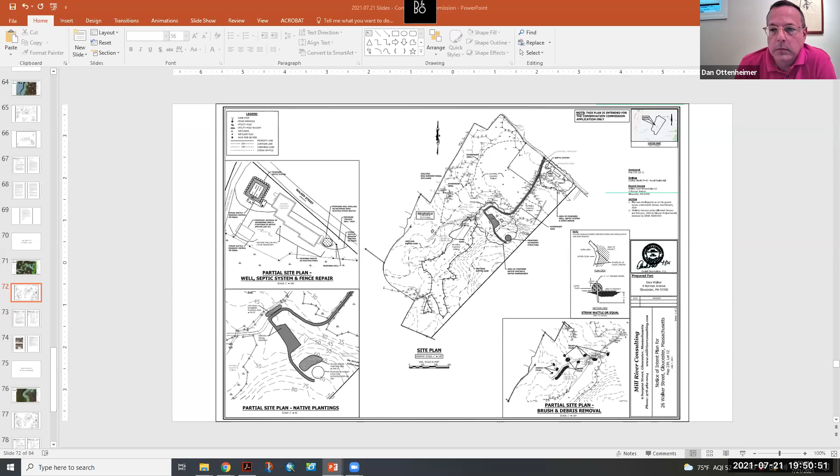Yes. Thank you. Commissioner Jackson moves to approve NOI 0282791 at 26 Walker Street with the aforementioned conditions. Charpentier seconds.

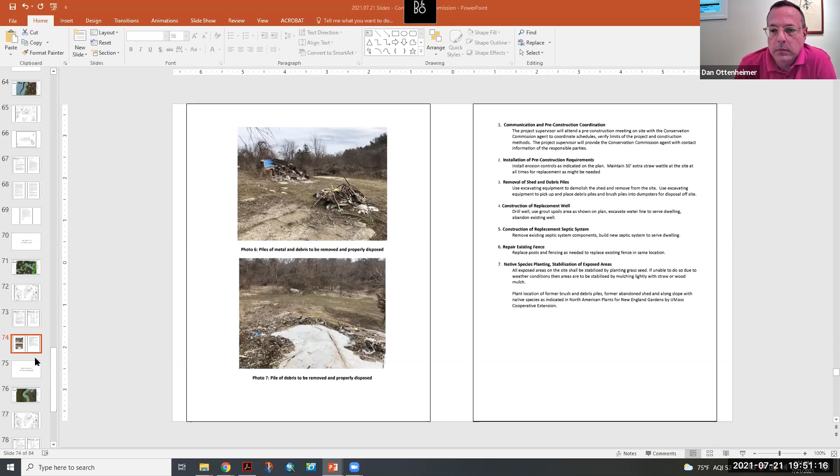Roll call: Commissioner Cook, yes. Commissioner Gradwall, yes. Commissioner Sargent, yes. Co-Chairwoman Jackson, yes, and Co-Chairman Gullo, yes. Thank you.

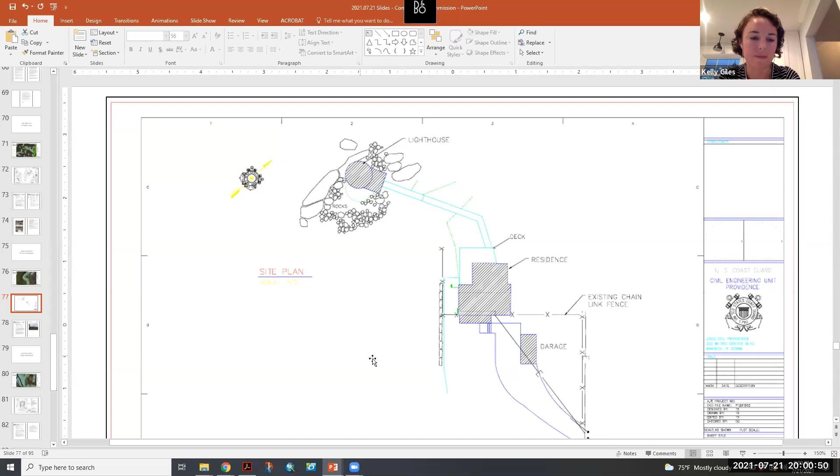So they're not doing any lead removal from the building, the lighthouse or the house, just removing these soils, correct? Well, we are actually doing some lead abatement work, not on the lighthouse itself, but we are working on the keeper's house, the garage, and there's a small oil house on the property as well, removing lead-based paint from some painted foundations.

The painted stone siding of the oil house, but nothing on the lighthouse itself. Okay, and you guys are the experts, I stay out of it. It's a good thing to be done.

I would just be concerned that if we go into a dry spell and get really dry weather, what's the plan to minimize any of it blowing around or moving around? Well, the soil that we excavate, we plan to live load into trucks as soon as possible to get it off the property, so we don't want stockpiles sitting around. If anything is stockpiled, it will be put on plastic, surrounded by silt fence, and also covered with plastic. We'll also silt fence around all open excavation areas to prevent erosion, so our goal is to not let anything spread into the streets or otherwise.

Okay, thank you, that's all. You're welcome. Commissioner Bradwell, no comment. Commissioner Sargent?

I note that the lighthouse is on the Annisquam River, and I'm just wondering if the Rivers Protection Act is applicable or not, and would require an alternative analysis.

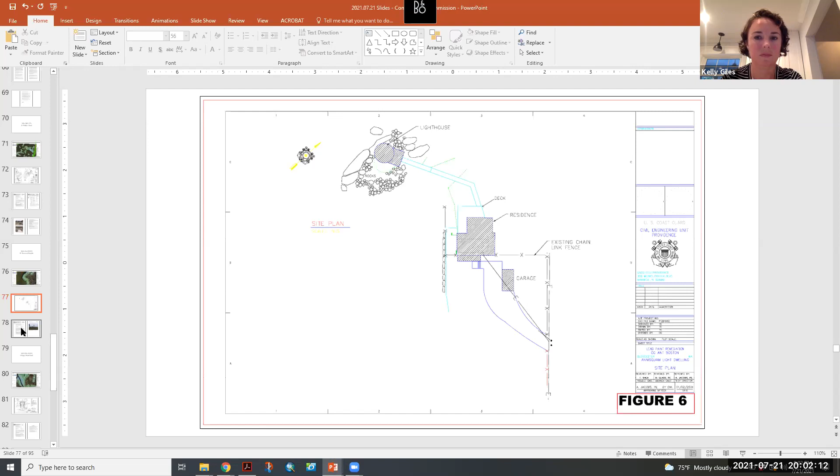Co-Chairwoman Jackson: I would think this is almost a clearer case of redevelopment than I felt on some of the others we've discussed tonight. But other than that, I have no comments.

Co-Chairman Goa: I don't have any comments. This seems pretty straightforward. The only issue would be transport and removal and how well that's taken care of, and that was explained pretty clearly. The only other wrinkle is whether we consider it redevelopment, which I would agree with Ann Joe - this is closer to that than anything else we've dealt with tonight.

This is actually a limited project, so it's already accounted for. Unless commissioners have anything else to add.

They do not have a number yet, they are waiting for the fee. So we have to continue, unfortunately, because we do not have a DEP number. Does that mean the DEP hasn't received our fee? It does say in the comments, waiting for fee - that means they've reviewed the project and don't have technical comments, but they don't issue a permit ID number until they have the money in the bank. The checks haven't cleared.

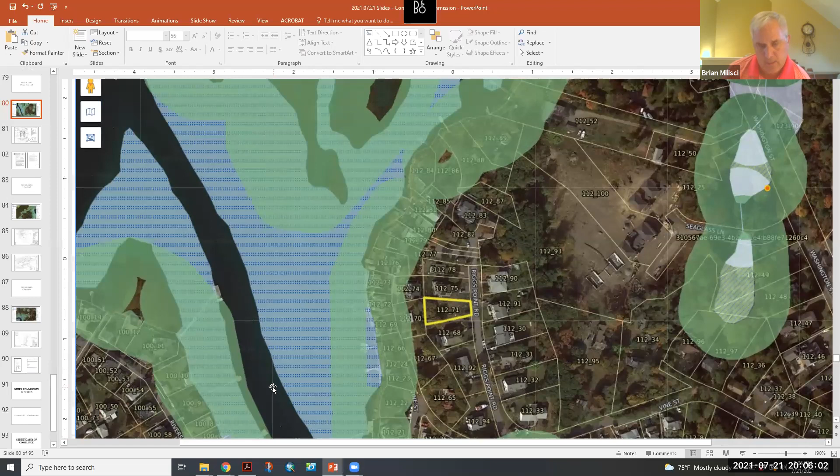Good evening, Mr. Chair, members of the commission. For the record, my name is Brian Milisci, an engineer with Whitman and Bingham Associates, here representing Mary Villare, the property owner at 8 Riggs Point Road. Just a quick bit of history: back in 2011, we originally filed a notice of intent on this piece of property, received an order of conditions, and some of the work - you can see on the plan where we show the location of the former house.

The existing dilapidated house was razed, getting ready to build a new house, and there was some reservations going on and some hemming and hawing. Then the property owner at the time, Mary Villare, fell ill, and after a long battle she ended up passing away last July. During that time, they let the order of conditions for this property lapse, as well as the zoning board of appeals permit that we went and garnered on this piece of property.

So this is a refiling, if you will. You'll see later on the agenda that we are on for a certificate of compliance to close out the old DEP file number and then get a new one, hopefully. We were in front of the zoning board of appeals just after the first of the year and have received an updated ZBA permit, since it's an undersized lot with frontage and area issues. However, we have that ZBA permit in hand.

This property, located at Riggs Point Road - as the crow flies, approximately just a little more than half of the lot is located in the outer riparian zone of the Mill River. The inner riparian zone is off the property, to the upper left-hand corner of the plan, or west of the property. However, the property sits roughly 40 feet above the water level of the Mill River.

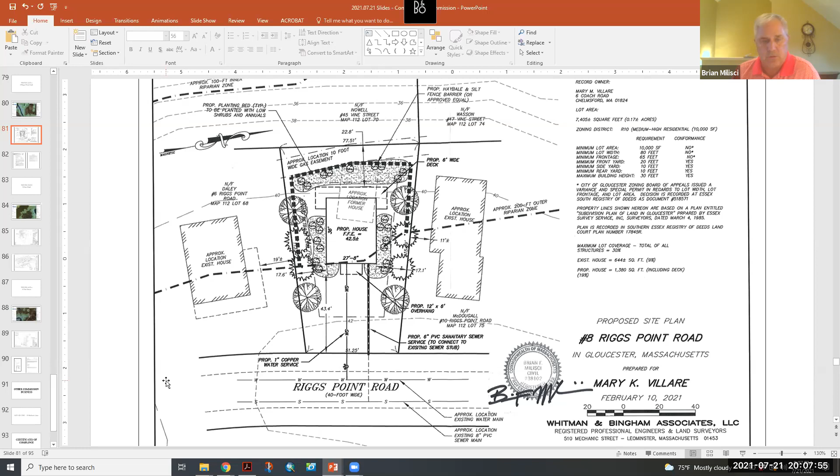What the applicant would like to do is construct a single-family home on the property. This plan in front of you - I should point out the applicant is now Mary K. Villare, referred to as Kathy Villare. That's Mary's daughter, so we tried to make that distinction between Mary Kay and Mary. It's not the same person, but she's the executrix of the estate.

This plan is very similar, if not exactly similar, to the plan approved back in 2011. We've situated the proposed house in the middle of the lot, which isn't very big, and moved it back a bit to get a couple of gravel parking spots in the front. The area is serviced by municipal sewer and water, and there's a gas easement traversing the rear of the property.

So we filed a notice of intent, and the property owners would like to get an order of conditions to do that work. I know I was probably quick and forgot half the stuff I was going to tell you, but we can go over that if there are any questions.

No, it's clean and concise. Thank you, Mr. Chair.

Okay, so next up we go to public comment. Anyone in the public who wishes to speak for or against the project at 8 Riggs Point Road may do so now by hitting the raise your hand button or hitting star 9 on your handheld device or phone. I see no members of the public to comment at this time. Seeing none, hearing none, I'll close the public comment period.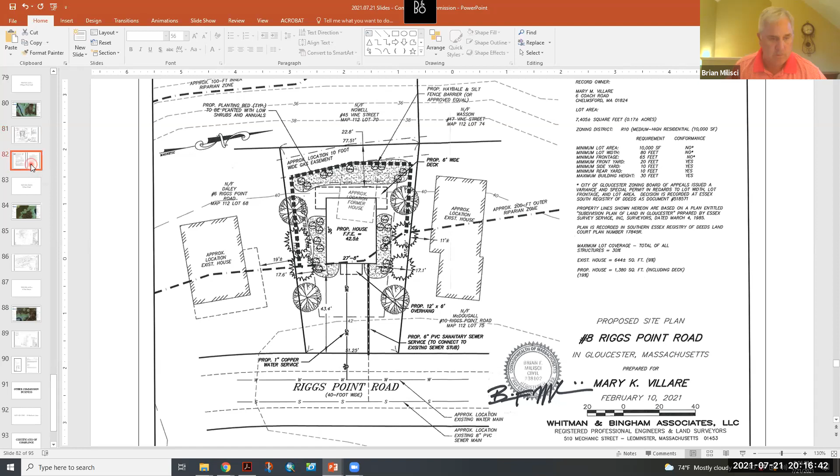Next up, notice of intent 28, no DEP number, 8 Russ Road, Scuteri, John and Gateway Consultants representing. Thank you, Mr. Chairman and members of the commission. Once again, John Judd representing Jeffrey and Jen Scuteri. This is 8 Russ Road over on Rust Island.

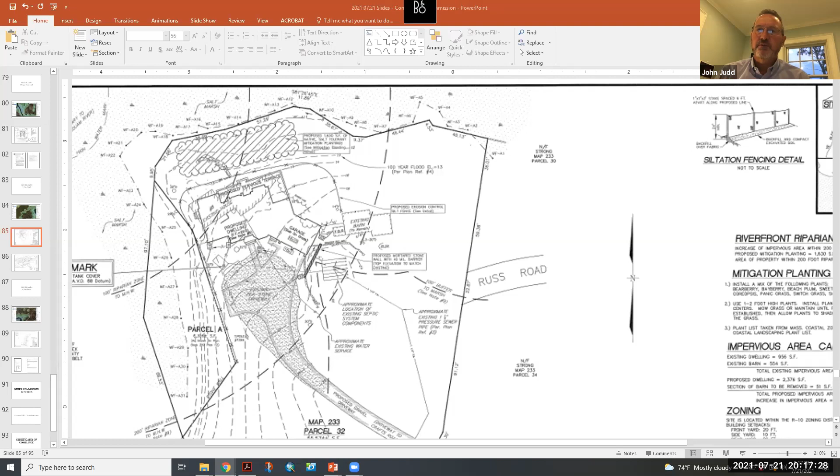This project is proposing to raise and reconstruct the existing dwelling on the property. This is associated with the riparian zone in the marsh over off the tributary behind Lobster Land that comes in off the Annisquam River. So what you see on the plan, the existing dwelling is the hatched area and the proposed dwelling is darker. There's an existing gravel driveway that services the property, and that's going to pretty much remain the same.

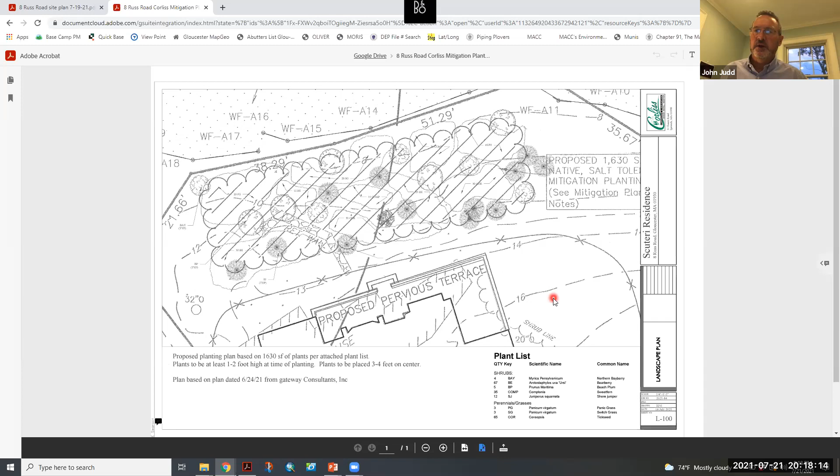The existing septic system that serves the dwelling will remain. We have a fairly robust planting plan prepared by Corliss Brothers with native species that should be in your package as well. You can see the 1,630 square feet of mitigation planting, which is a 200% offset of the proposed increase in impervious area, tabulated on the site plan. So we are within the buffer zone to the mean high water.

The proposed dwelling is going to be no closer to the marsh, and we are going to have pretty significant planting that doesn't exist now, mitigating the 200% requirement. So really it's a reconstruction. We are lining everything with proposed stake silt fence during construction, so you can see the limit that Adrian has outlined. That's a brief description.

This is a redevelopment, so we are applying under a redevelopment under the Rivers Act, and we are outside the flood zone with the proposed structure. Jeff and Jen are on the line as well. If there are any questions, we can answer those at this time.

Okay, first step in the journey is public comment. At this time, I'll open it up to the public. Anyone who wishes to speak for or against the project at 8 Russ Road may do so now by hitting the raise your hand button at the bottom of your screen or hitting star 9 on your phone or handheld device.

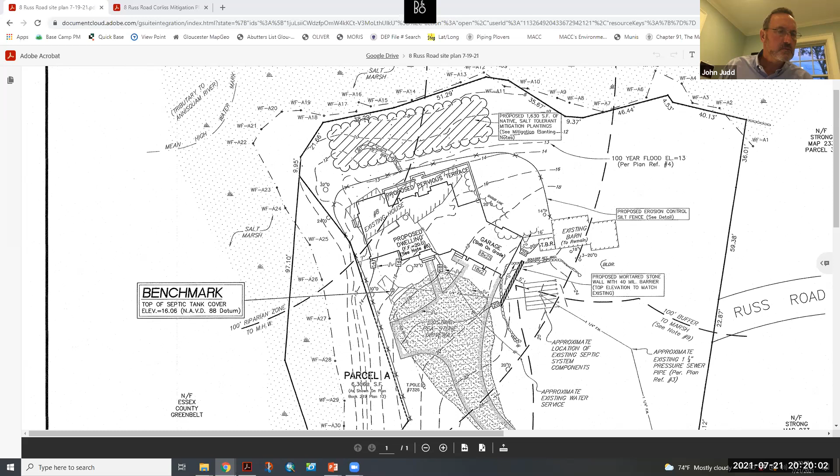Yeah, it's Russ Road, but see where it says proposed gravel driveway going over to Crafts Road. Where's the existing driveway? Is it not shown, or is that what it was? That's where it is, and that's where it will continue to be, Bill. Okay, because it says proposed, that's what I'm wondering. It's existing, and it's proposed to go over the same.

You can see we're going to tighten it up a little bit. It's circular at this point, comes into sort of a mini cul-de-sac. We're going to be removing some of that and have a turnaround going in and out of the garage as shown. Okay, oh that's good. Yeah, that was the only question I had. Yeah, that's better.

Commissioner Gradwell, no comment. Looked very complete to me.

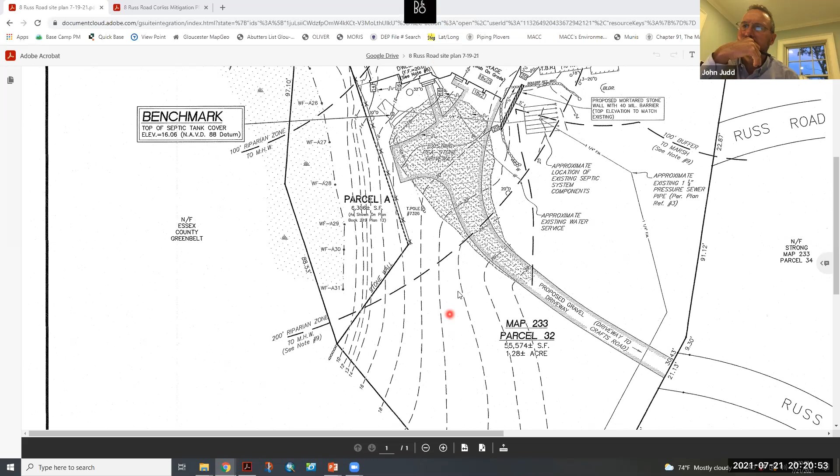Commissioner Sargent: I'd like at least a 2-year monitoring of the mitigation plantings. And just a friendly suggestion, don't plant beach plums because deer love them.

Okay, got it out for the deer tonight. I know, the poor deer are getting hit, taking it on the chin.

Next up, Co-Chairwoman Jackson, no comment, and Co-Chairman Gullah, no comments.

Okay, so we got 2-year mortality monitoring. We're gonna tighten up the road. It is a little hard to read, but I get it now. I'm glad Bill asked. So we still have to vote on redevelopment, I believe, and I guess I don't have anything else if no one else does.

I just want to point out as a point of information for everyone before we start, although I know, Mr. Judd, you probably already know this, this project is not even on the dashboard yet. Yep, as the previous applicant had said, we submitted this to DEP. They had the check, I think they're just inundated right now. So we understand it has to be continued.

Okay, Commissioner Jackson moves to consider the project at 8 Russ Road with the unassigned DEP number as a redevelopment project. Charpentier seconds. Roll call: Commissioner Charpentier, yes. Commissioner Cook, yes. Commissioner Gradwell, yes. Commissioner Sargent, yes. Co-Chairwoman Jackson, yes. Co-Chairman Gullah, yes. Thank you. So we're gonna move you to the 4th, John, is that right?

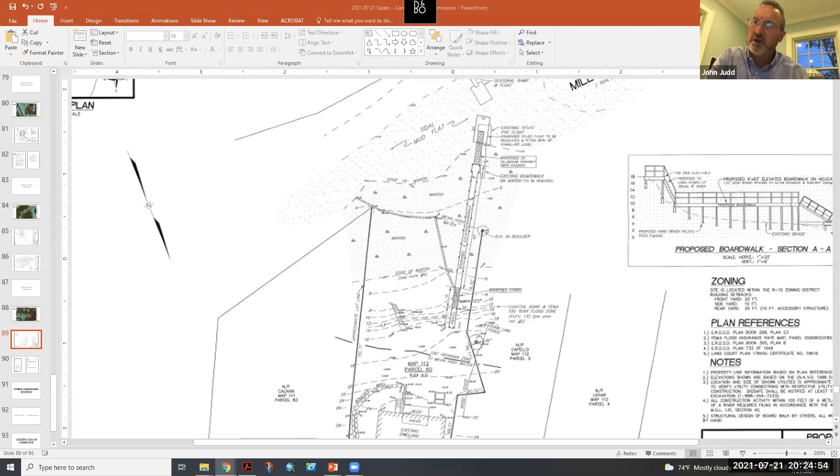This is a proposal for an elevated boardwalk to service their existing float on Mill River. You can see that they have an existing, not so elevated boardwalk. It's about 30 feet long, right on top of the marsh, and it goes down into a seasonal ramp. You can see there's an existing PVC float and a boardwalk that's there.

So what we're proposing is to follow the CZM guidelines and elevate this to have the appropriate vertical separation above the marsh, using helical driven supports that would support this proposed 4-foot elevated boardwalk to go to a seasonal ramp and float in more or less the same location on the Mill River. This elevated boardwalk is 93 feet in length, and you can see we have a minimum of 3 to 4 feet in most spots above the salt marsh that extends from their property out to the tidal flat.

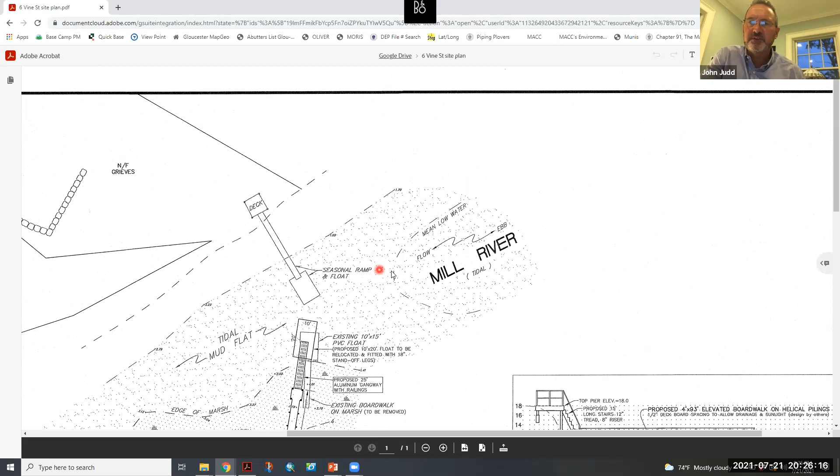And we're not exceeding the recommended float size that this commission likes to see. So we're essentially elevating an existing boardwalk over the marsh, and we are proposing helical ties for the PVC float that's out there, and 18-inch high legs to ensure that we are above the mud flat at low tide.

And that's a brief description. I know we're still looking for comments, Adrian, I'm not sure if you've seen any from Shellfish or TJ. I have not seen any yet, and obviously we still need that DEP file number. I've not seen anything from the Harbor Master's office or Shellfish. I have received from the Division of Marine Fisheries, in lieu of a comment email with recommendations. The dock and pier recommendations say that the pier should be at 1.5 to 1 height to width ratio above the salt marsh, and the float should be 30 inches above the sediment. Otherwise, no concerns about the proposed project.

So I think what we're aiming to do here is an improvement overall over the previous conditions in the eyes of the Division of Marine Fisheries. We will certainly have to hear from Shellfish about that, and also the Harbor Master with regard to navigability in the Mill River. It's getting tighter and tighter, of course, every year.

Okay. Commissioner comments? Commissioner Charpentier. No comments. I'm sorry, we did not do the public comment period. Okay, I'll open up for public comment. Is anyone who wishes to speak for or against the project at 6 Vine Street? You may do so now by hitting the raise your hand button at the bottom of your screen, or hitting star 9 on your phone or handheld device.

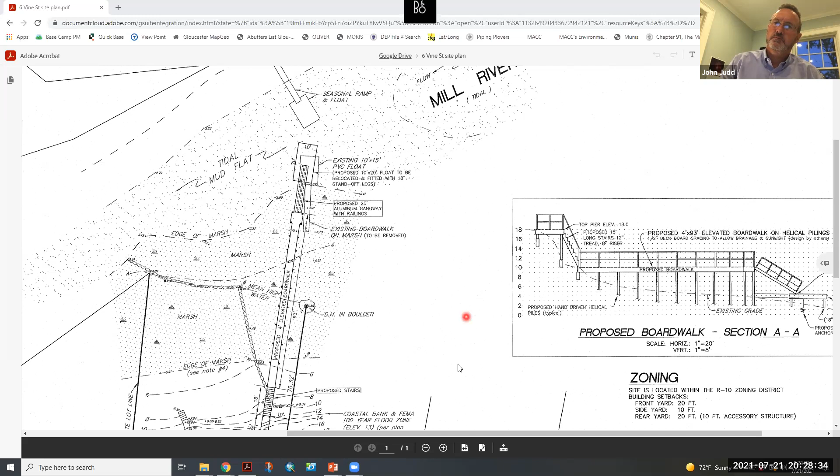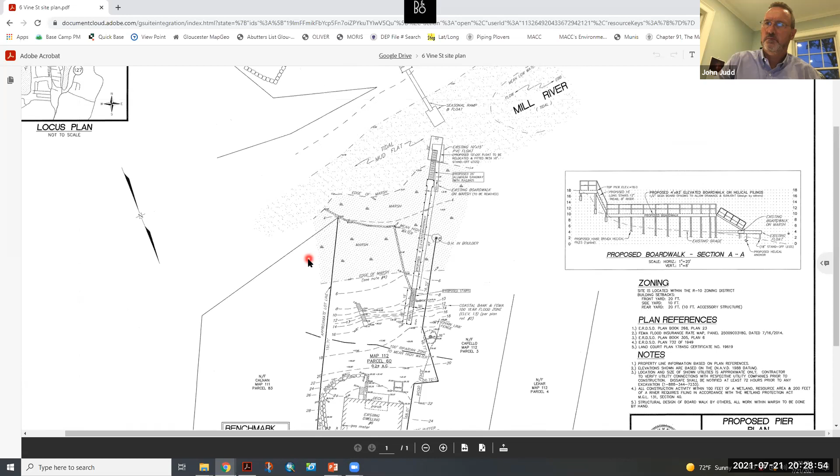Yeah, hi. So my name's Christy Grace, and I own the property at 554 Washington Street, which has water access. My main concern is that if this project is approved, my property will no longer have water access. As it stands right now, a new dock at 548 Washington Street was approved before I owned the property and was just recently put in, which has caused my water access to be limited considerably already. The new pier project, if approved, will cut off basically all of my water access, making it very difficult to get a small boat, a small canoe, or even a tube through the tiny gap that will be left.

The existing float on 6 Vine Street is 10 feet by 15 feet. The new proposed pier plan shows that the new float will be 10 feet by 20 feet, making the actual float 5 feet longer. I'm not sure if the plan was based on high tide or low tide, but that is something to take into consideration. The plan shows that the new dock will be relocated further out from the existing dock, making the gap of water between the two docks, the one on Vine Street and the one on Washington Street, even smaller.

Lastly, I would also like to point out that the extra space, the engine motors, ladders, ropes, etc., sticking out off the end of both docks should be taken into consideration as well. We all have equal rights. We all should be able to go into the water. My kids want to take their canoes out. It's very limited, and I think the plan doesn't show the actual footage and how much room there is. The relocation of the dock is actually a really big deal because it moves in more and comes out more, and the gap will almost completely be closed. Thank you, that's all.

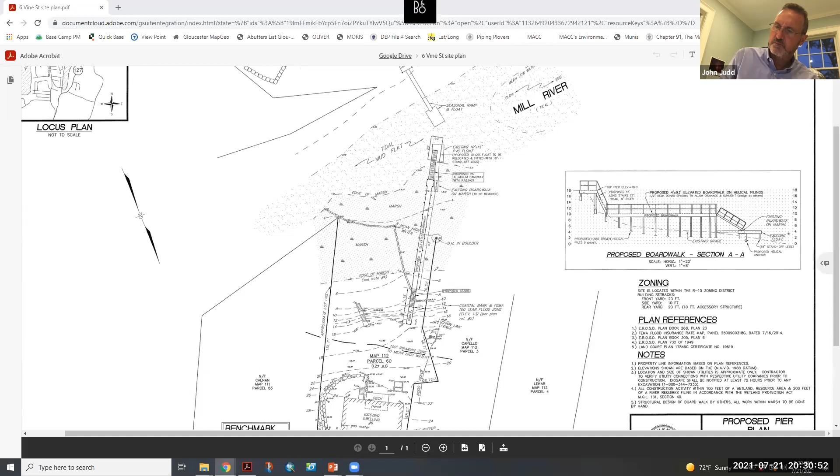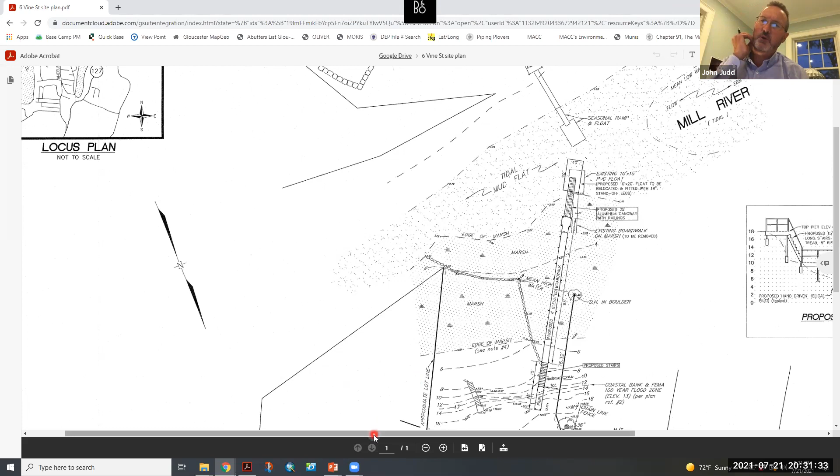I guess, Mr. Judd, based on that, I think, I don't know if the harbor master is going to pick up on this or what, but it's going to require a little bit more work on your part to make sure this is all workable. Yes, I'll speak to Kevin and Debbie, and based on the comments I just heard, we'll probably bring it back to match that existing float line that currently exists, to ensure that the abutters can get through that channel. The idea was we were hoping to get the back of the float right at the marsh, so we may be able to turn it 90 degrees to achieve that.

Okay, well, we appreciate anything you can do there. I'm sure the neighbors would too. All right, why don't we do commissioner comments?

Commissioner Charpentier: No comments. Commissioner Cook.

Actually, the only comment I had, and we're going to be dealing with this more and more, is I think that the woman across the street who just spoke really needs to talk to the harbor master. If the harbor master is coming in and approving all of these floats, which we require him to do, he's got to be made aware of some of these situations starting to occur. For example, if we just approved a new one adjacent to her property that's impacting her ability to use her existing one, that information's got to get back to the harbor master. It's not coming from us, but it's got to come from the homeowners. He may have to start taking a tighter look at some of these, because we're seeing this up and down the river now with people trying to put in bigger and bigger docks constantly, and it is going to be an issue.

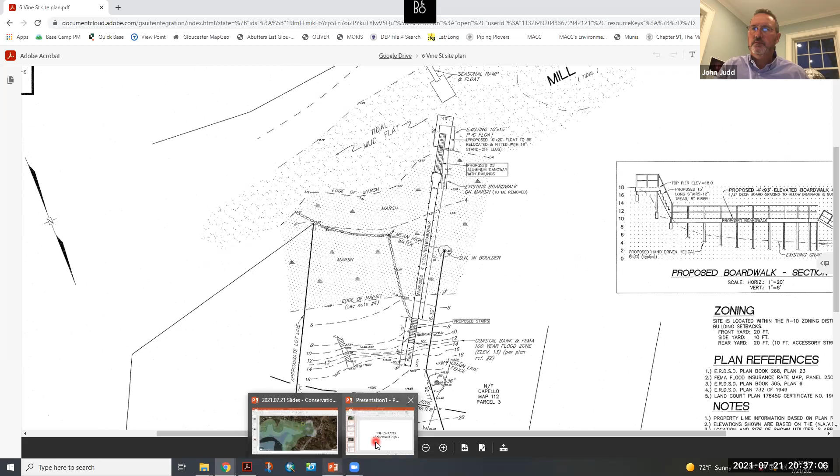Commissioner Jackson moves to continue 6 Vine Street, with an unassigned DEP number, to the meeting of August 4th, for the purpose of plan refinement, securing of harbor master and Shellfish comments, and DEP number assignation. Charpentier seconds. And a roll call.

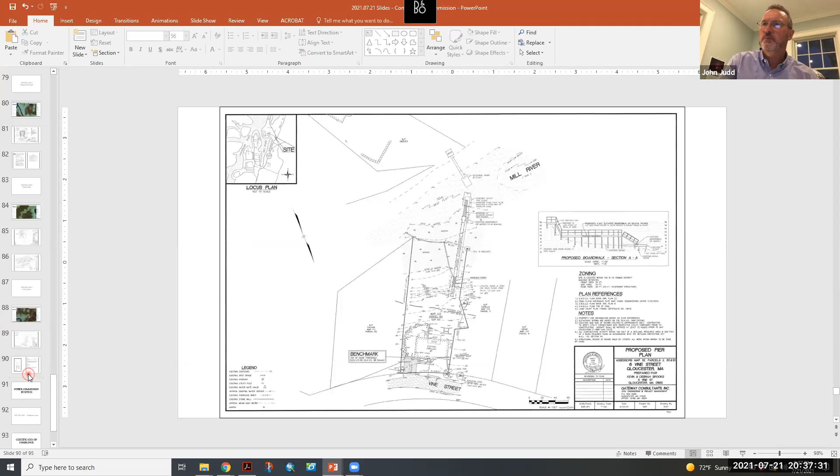Commissioner Charpentier: Yes. Commissioner Cook: Yes. Commissioner Gradwell: Yes. Commissioner Sargent: Yes. Co-chairwoman Jackson: Yes. Co-chairman Gullah: Yes. Thank you.

Thank you, Mr. Chair. Thank you very much. Have a good night. Have a good night. All right.

Now can I go to other commission business? You may. I may. Extension 0282510 and...

28-2562, 18 Bayberry Lane. Okay, I need to recuse myself on this one. Oh, yeah. So I'm going to carry the rest of this. And I just want to show you this extension permit 2562.

I don't know if you can see this, or if it's just entirely too small.

2562 is for a project the commission has approved where the dune is actually growing on the side of Wingaersheek Beach, and every winter it backfills against this house. We have an open order of conditions you've approved to allow them to clear a path annually and move the sand in such a way that it improves access to the beach for everybody that uses that pathway. This one will stay open as long as the dune grows there.

Any comments, commissioners? Nope. Okay, so do we want to move this extension? How many years? You can continue it for up to 3. This one I rarely go to 3, but this one seems like it's never going to change.